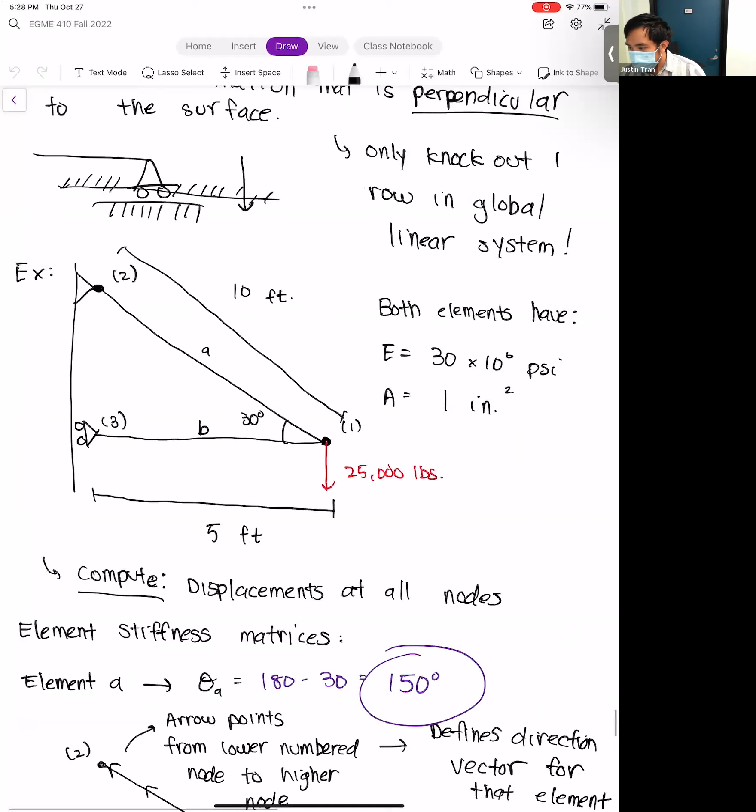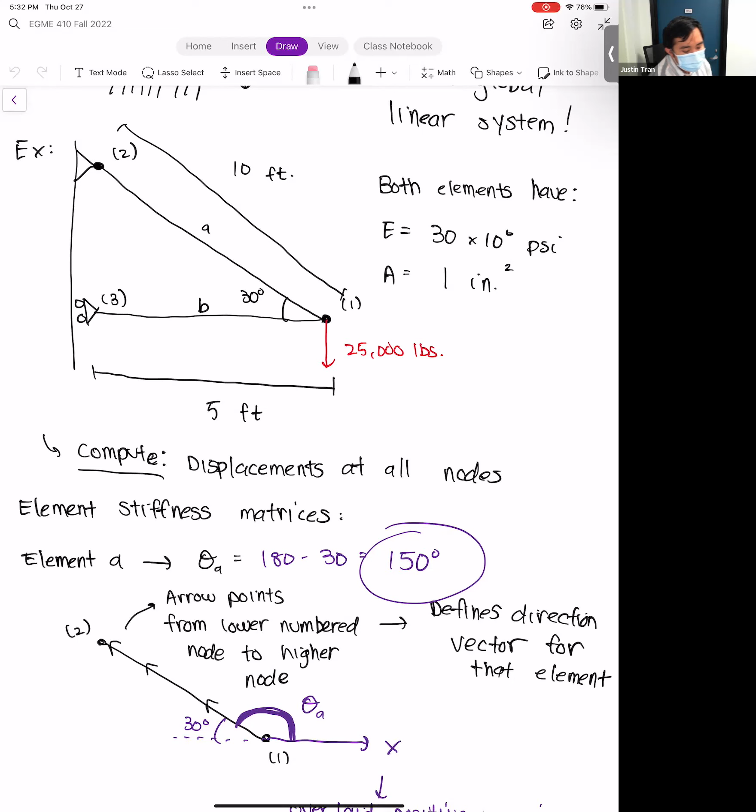So this is the example we were doing, a simple 2-truss system with two elements, element A and element B. Just like normal, we're interested in computing the nodal displacements for this truss bar. We're going to go through our entire finite element process same as before: computing the element stiffness matrices, assembling them into a global stiffness system, and then solving it from there.

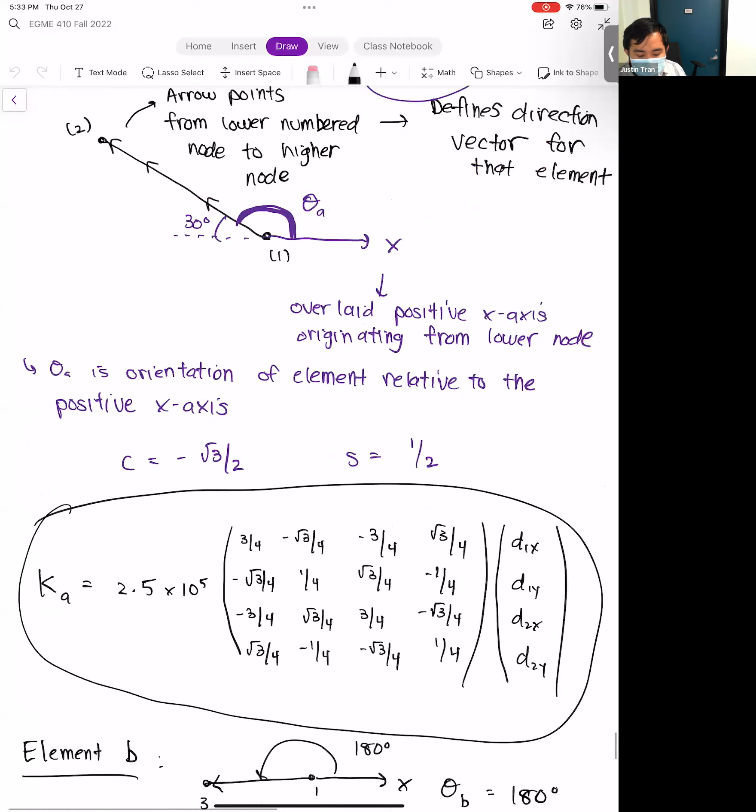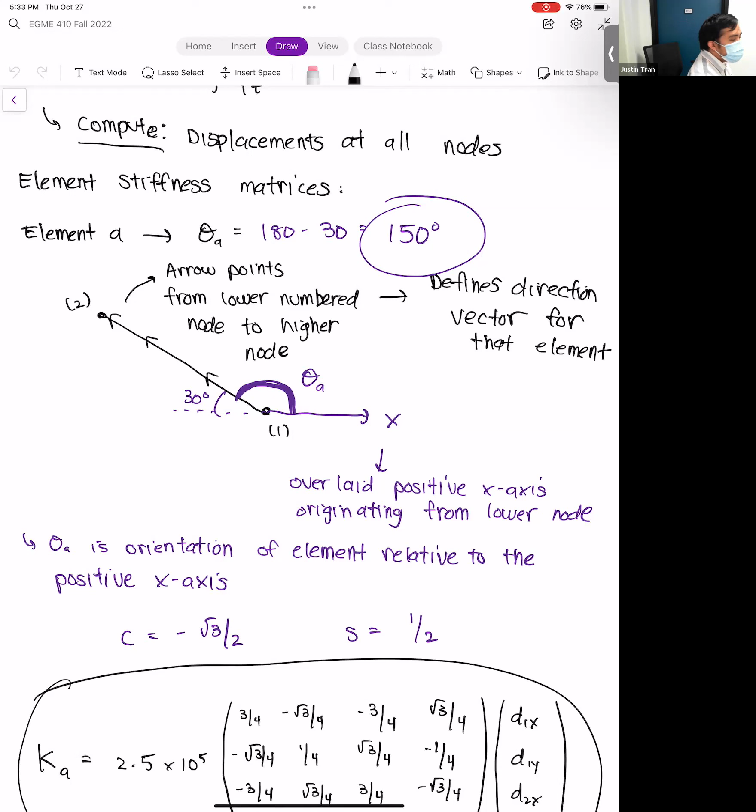Where we left off was computing these element stiffness matrices, and the main point I wanted to make before we left last time was to be careful about the angles you put into the system, because when we plug that into our element stiffness matrix for a 2D truss, the assumption is that the angle is the angle that element makes with the positive x-axis.

The trick I told you guys about last time was to take your element, draw an arrow from the lower numbered node to the higher numbered node—that's your element vector—and then compute what angle you would need to rotate from the positive x-axis in order to get that vector.

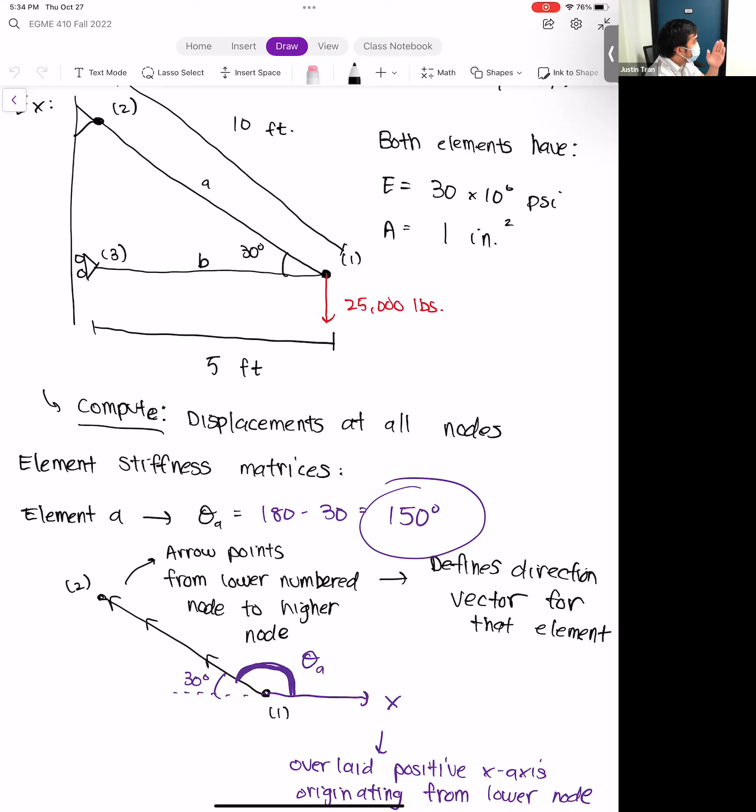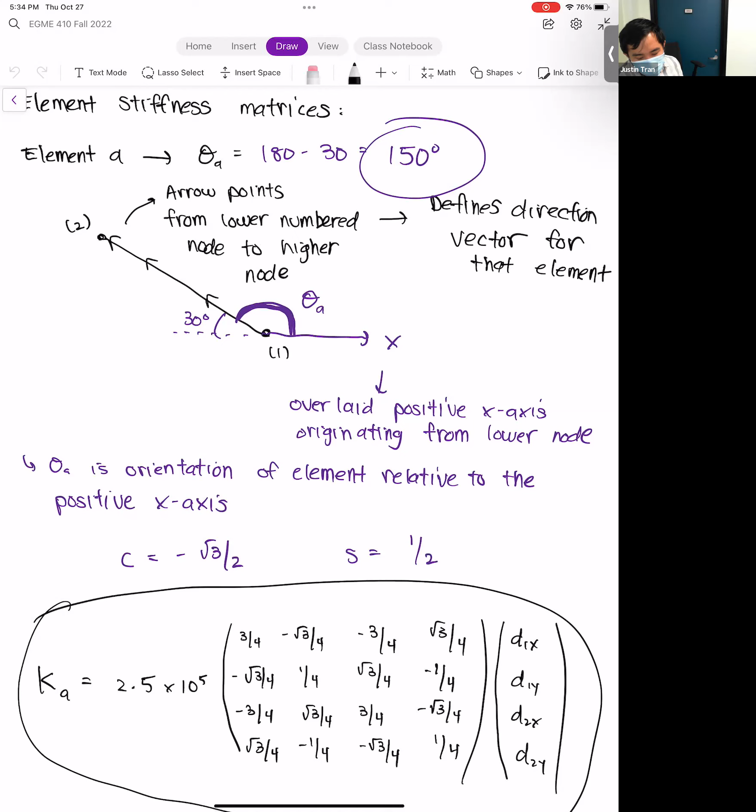For element A, even though in the figure we can see that element A makes a 30-degree angle with respect to element B, the arrow that points from node 1 to node 2 actually requires us to rotate by 150 degrees from there, and so we would have that rotation.

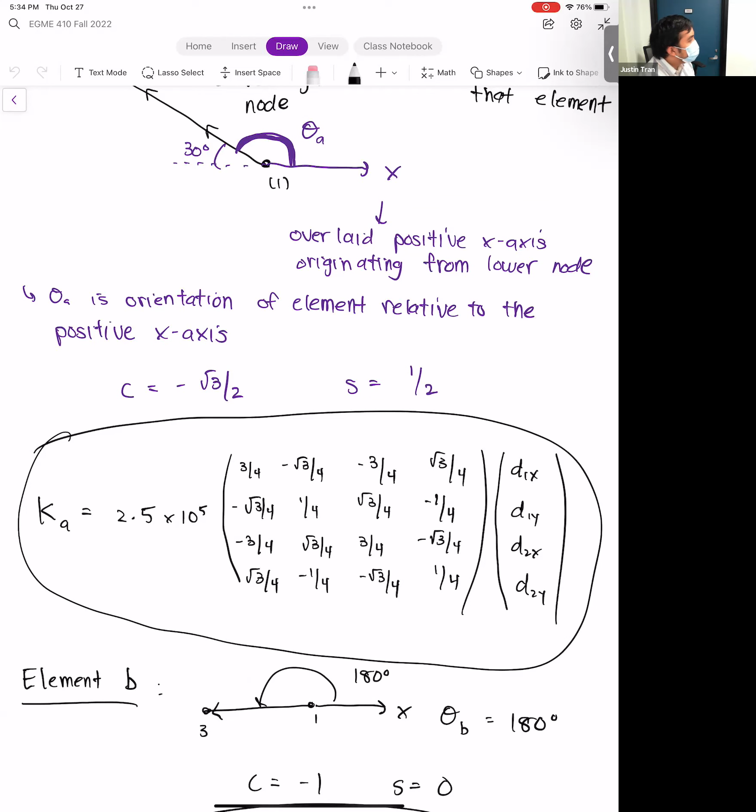And so the angle we plug in is 150. If we plug in an angle of 150, cosine of 150 degrees is minus √3/2, and sine of 150 is a positive 1/2. We plug all that in, plug in the values for AE/L, we get 2.5 times 10⁵, and then we get the following system.

And then we did the same thing for element B. For element B, even though it's a horizontal element, in order to get that exact angle, you would actually have to rotate 180 degrees, because the arrow from the lower numbered node to the higher node points to the left, so that would be 180 degrees of rotation.

We plug in 180 degrees, we get cosine of 180 is -1, sine of 180 is 0. We plug that in and get the following element stiffness matrix. So when you're computing these element stiffness matrices, you want to be careful about the angle you plug in, because it may not be obvious from the figure. Now that we have both element stiffness matrices, we are ready for assembly.

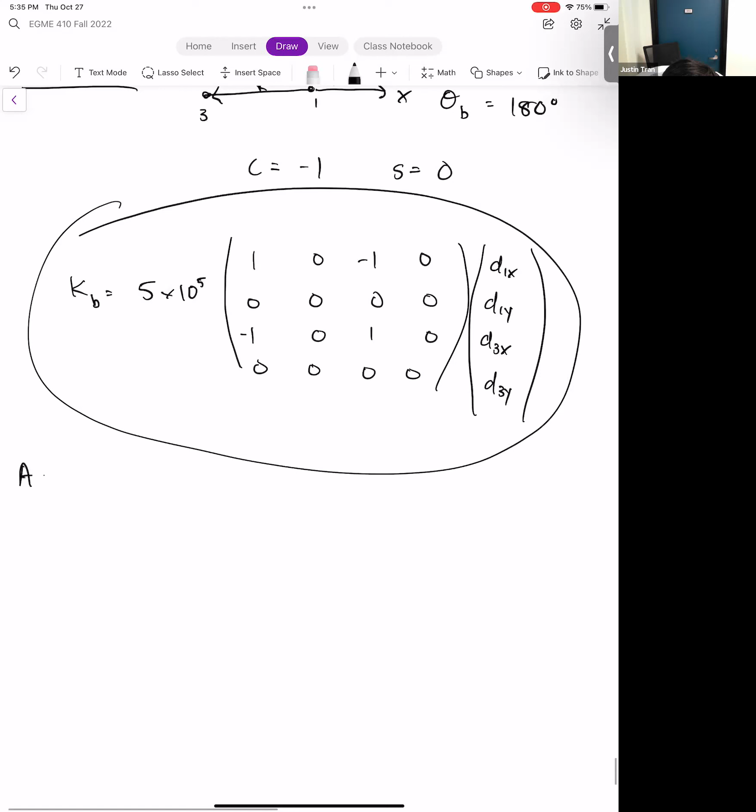So for this geometry here, we have 3 nodes, and since we have 3 nodes, our global stiffness system is going to be 6 by 6.

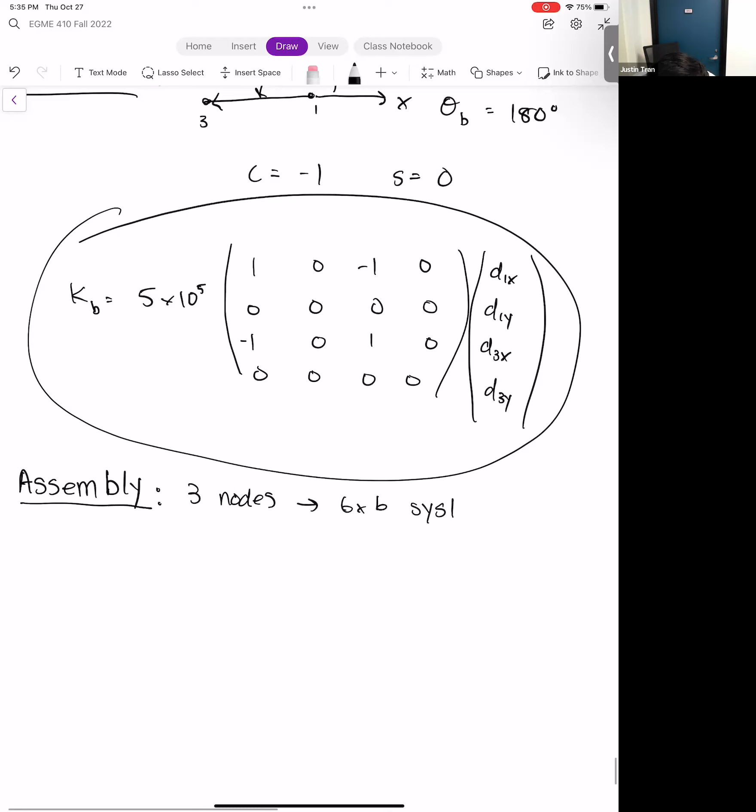Let me go ahead and do that. We're going to have D1X, D1Y, D2X, D2Y, D3X, D3Y. Now on the left side here, we're going to have F1X, F1Y, F2X, F2Y, F3X, F3Y. And of course, on the right here, we have D1X, D1Y, D2X, D2Y, D3X, D3Y.

All right, so there's our global system, and it has the X and Y deformations for all 3 of our nodes, so that's going to be 6 rows and 6 columns overall. And now we're going to be inserting the values into this system.

Oh, actually, let me do one thing first. Because we have a factor of 10 to the 5th on the outside there, I'm going to put a 10 to the 5th there, so that's just going to make it a bit easier for us when we plug in.

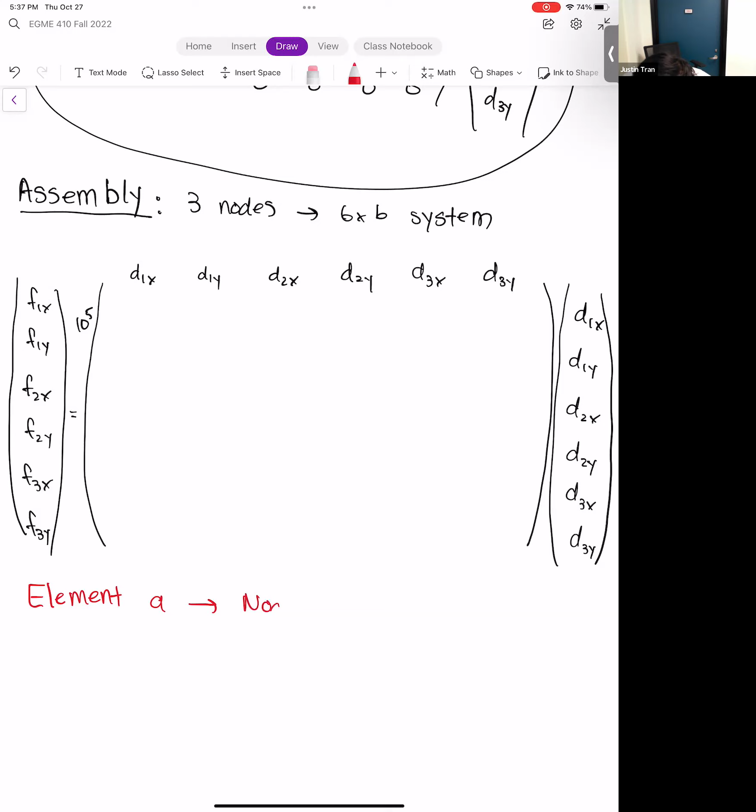All right, so let's start with element A. Element A here, we know is connected to nodes 1 and 2, and so that means we're going to block off the node 1 and 2 rows and columns of the global stiffness system.

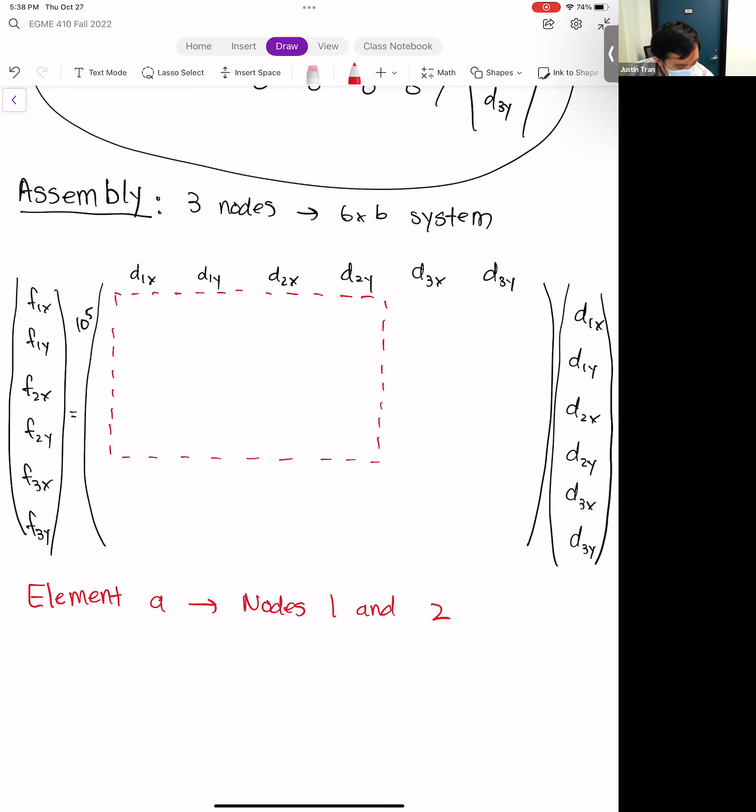And so that's going to be that segment there. I'm not going to fill in the values just yet because this actually gets a little bit messy because we have √3s over 2s, so I'm just going to show you what sections they're going to be in.

All right, so now let's do element B. Element B here is connected to nodes 1 and 3, and so we're going to block off those sections. Unlike element A, which gets a nice big contiguous block for all 16 values, for element B we're going to have to split it up.

So we're going to have this section for D1X, D1Y, and we have the cross sections for D1X, D1Y, and D3X, D3Y, and we have the D3X, D3Y, D3X, D3Y section. All right, so those are the sections of the global stiffness system where we're going to plug in our values.

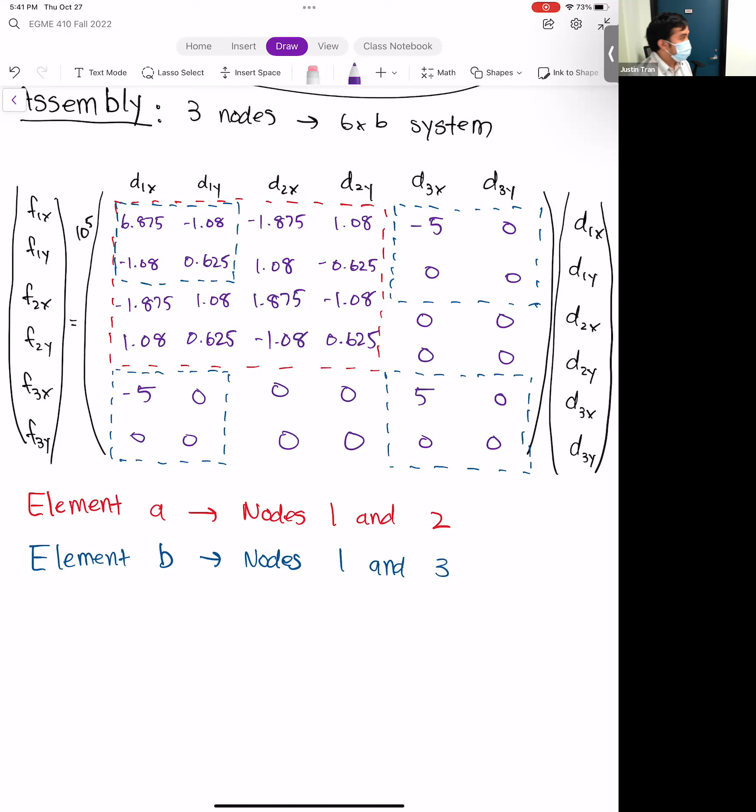So that is our global system. We entered all the entries from element A, and really all the complications are coming from element A. Element B kind of fills everything, and as always, for sections of the global stiffness system which are not boxed, we're just going to input zeros in those locations. All right, and so that is assembly.

Next thing we're going to do is the boundary conditions.

And as always, we're going to start with the supports, the places where we are constraining our geometry. Then from there, we're going to put in our loads, which we just have one in this case.

The first thing we notice from the geometry is that we have a fixed support at node 2. This tells us that d2x equals d2y equals f2x, f2y, all of that's going to equal 0. So we're going to go to those rows in the global stiffness system, the third row and the fourth row, for f2x, f2y, or d2x, d2y.

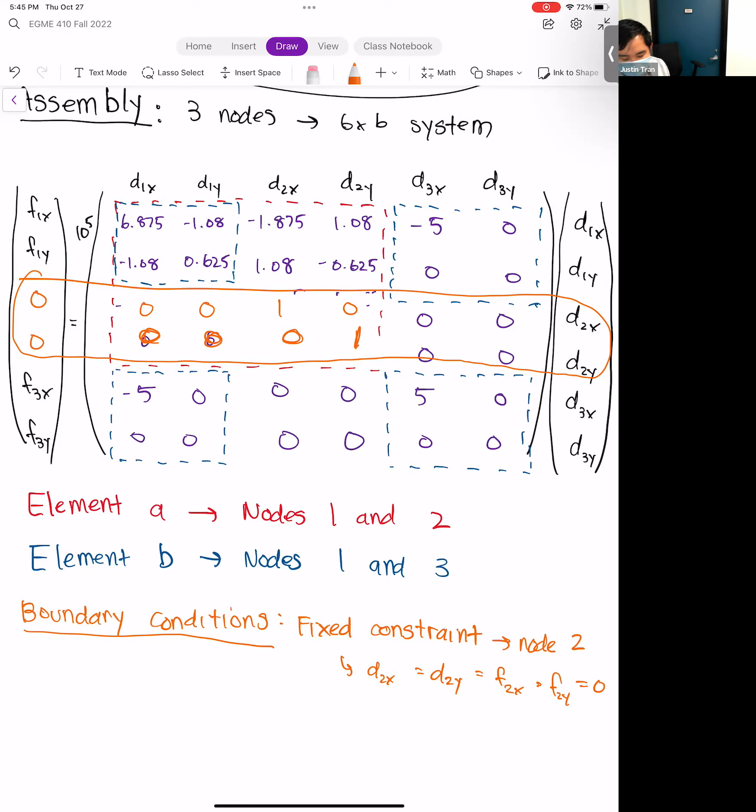And we're going to replace these with the appropriate values. That's our fixed support, so that's going to be knocking out rows 3 and 4.

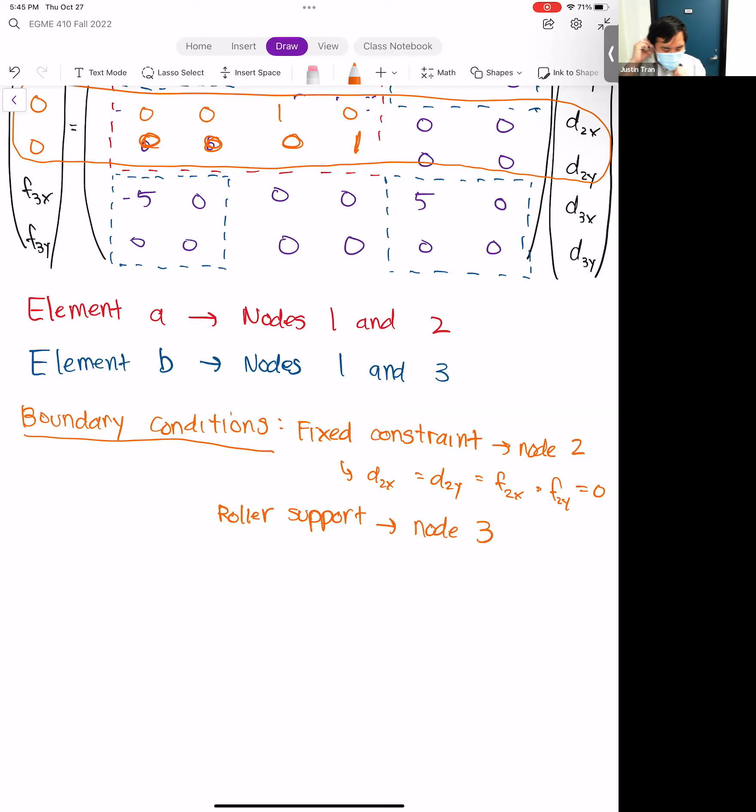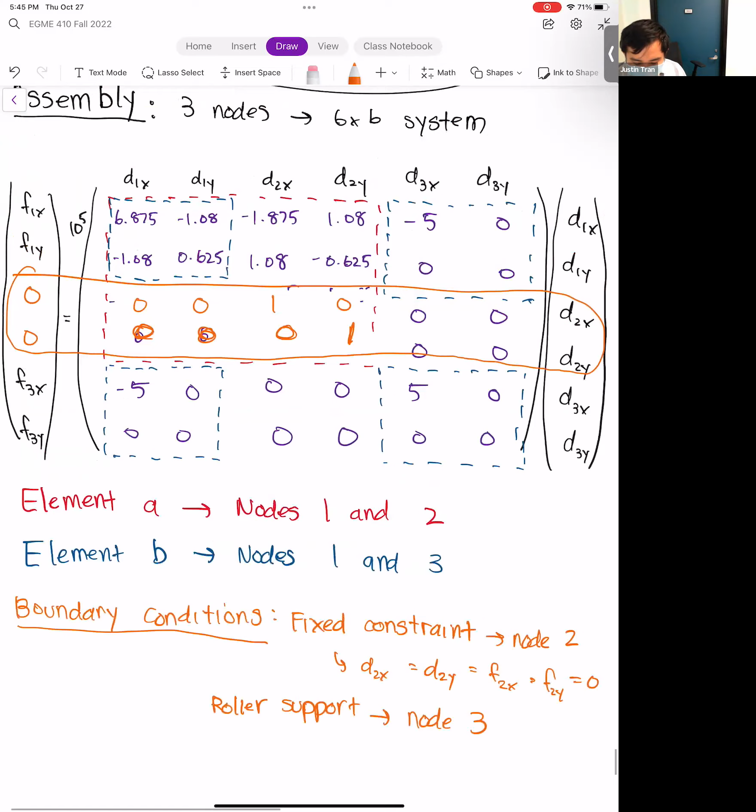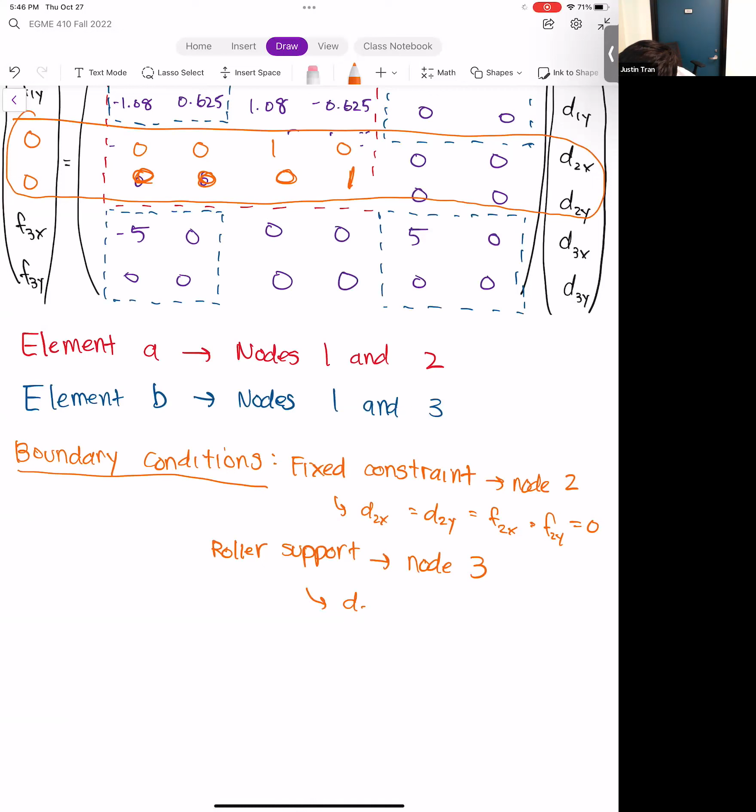Next boundary condition that we have is a roller support, acting on node 3. Remember, the roller support is a bit different than the fixed support, because it's only going to constrain one direction of the deformation. Going back to the figure, we can see that the roller here is vertical, so what this does is prevent any deformation in the x direction. This means that d3x equals f3x equals 0. So this is different. Normally with the fixed support we knock out both components of the deformation, but this time we're only going to knock out one of them.

So if we go to f3x right here, we're going to change this row just like we did the row above it, but we're not going to change the f3y row.

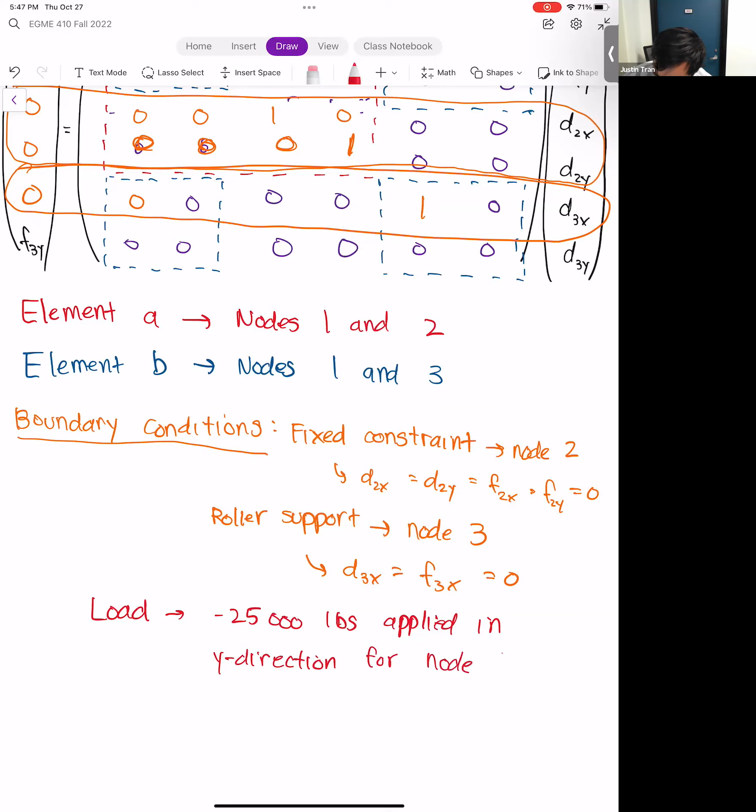So applying our boundary conditions, we get the following system. Although we're not done yet, remember we also have our load. Our load in this case is minus 25,000 pounds applied in the y direction at node 1. This means that F1y is equal to minus 25,000.

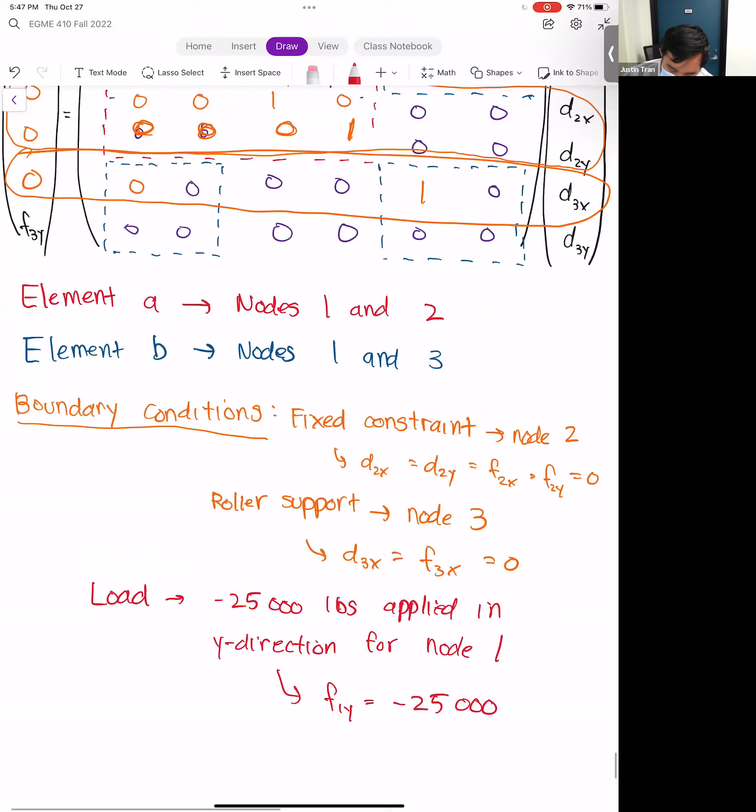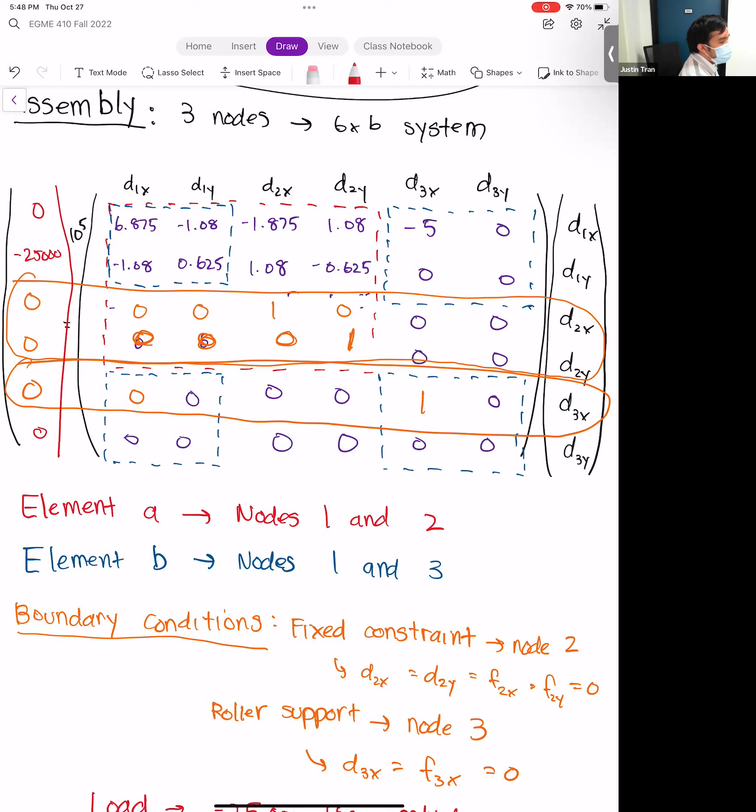And of course, this means that everything else that we haven't specified yet is going to be 0. That's the system that we have after we've applied our boundary conditions. Any questions on how we obtained this result?

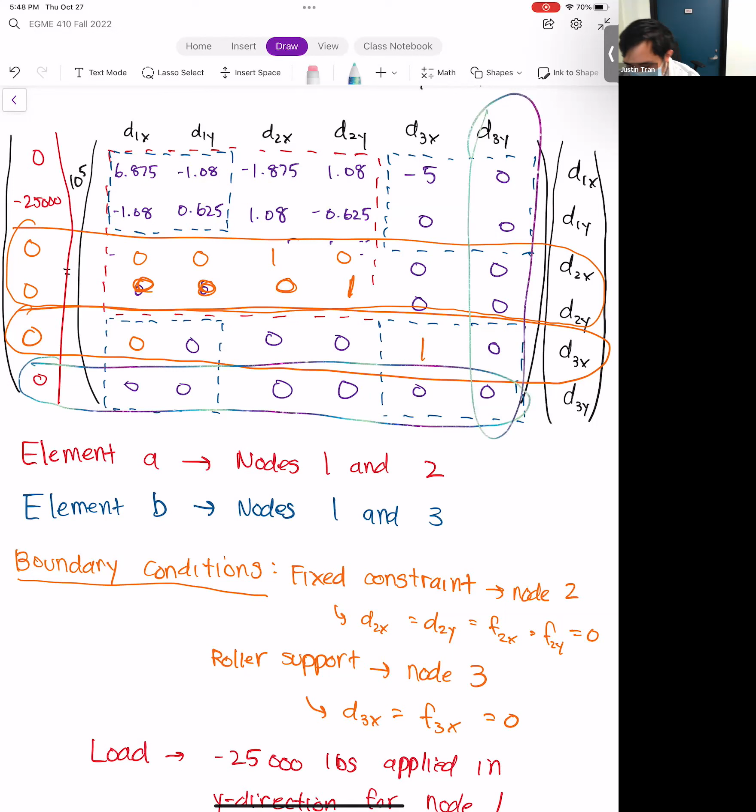At this point, usually we're ready to solve, since we've applied our boundary conditions. But there's one problem with this system, let me go ahead and highlight it. If you look at the section that's highlighted, you'll notice that everything in that D3Y row and everything in that D3Y column are all zeros. If you try to pop this matrix into MATLAB, when you have a row and column that's completely zeros, MATLAB is going to give you an error.

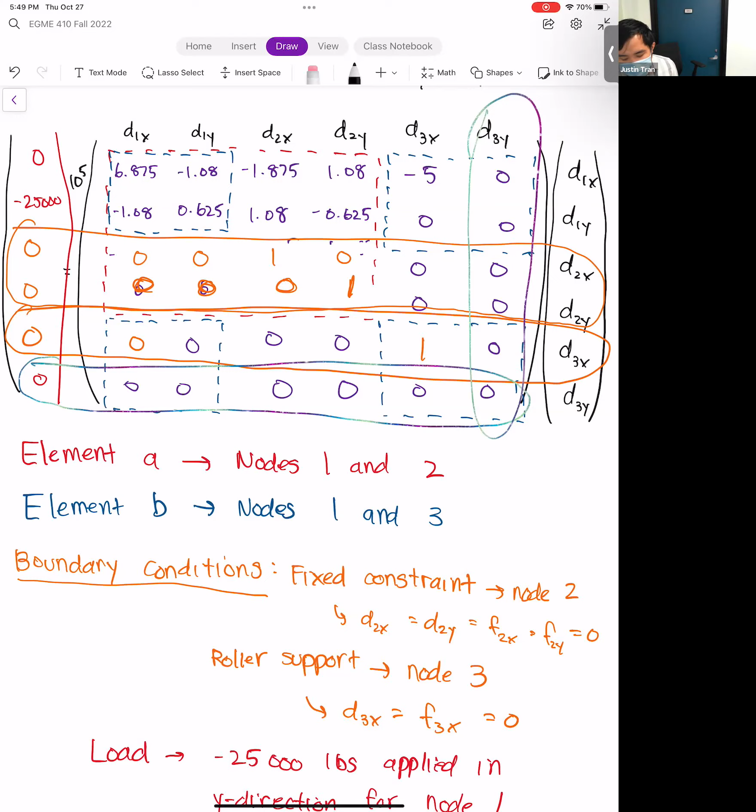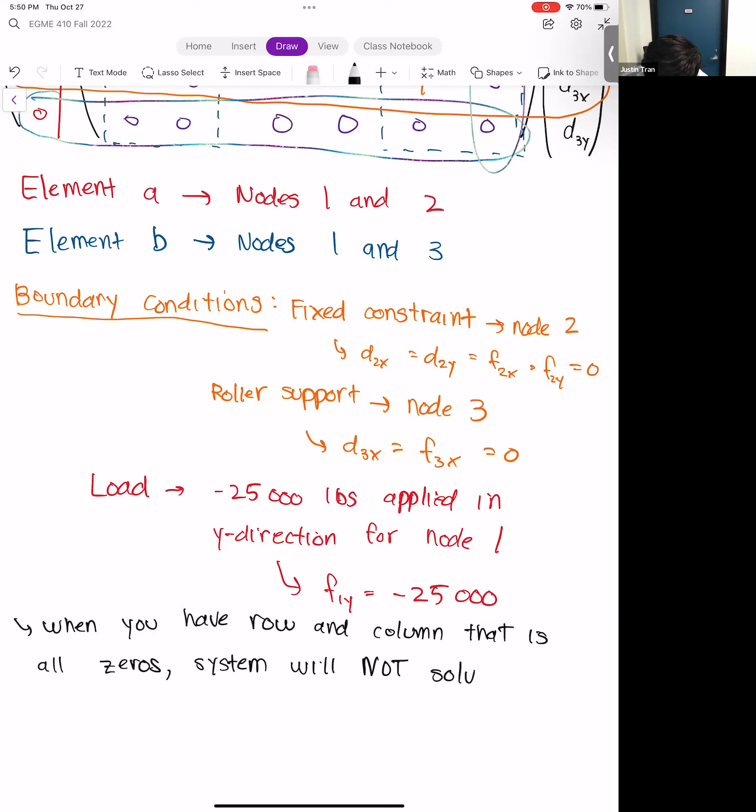It's going to tell you that this is not possible, that you can't solve this matrix. When you have a row and column that's completely all zeros, the system won't solve. If you try to plug this system into MATLAB, it's going to tell you it's not going to have a good solution. In order to fix this, in order to make it so that you actually can solve the system, what you need to do is go to that row and column and put a 1 on the diagonal.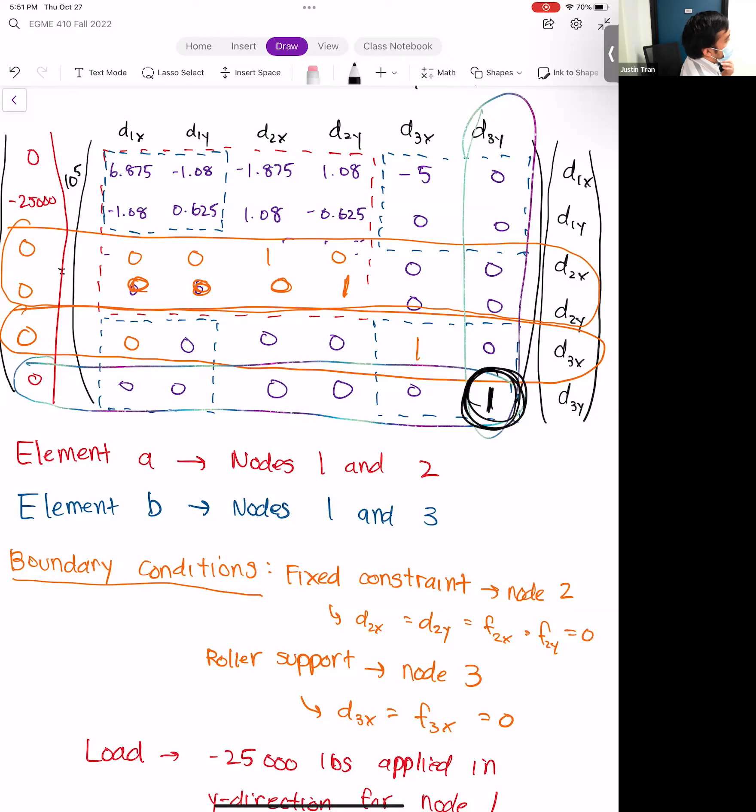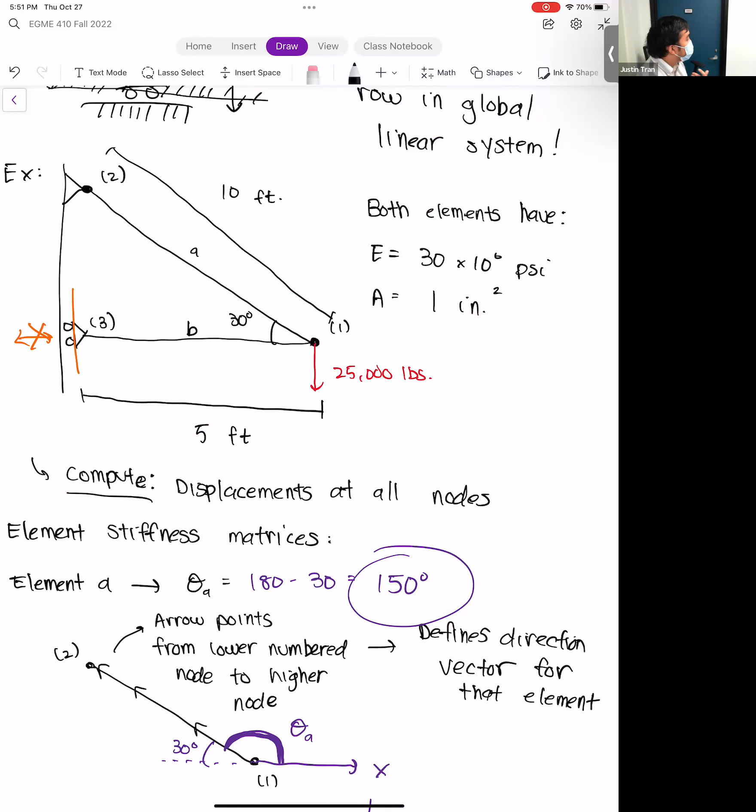So we're going to go here and put a 1 right here. We effectively turn it into a fixed support, even though we started with the roller support. What this is telling us goes beyond just a mild inconvenience. It tells us that if this structure is comprised of just truss elements, then if we put a roller support there, it's actually going to be unstable, and so it's not going to be able to sustain this kind of deformation.

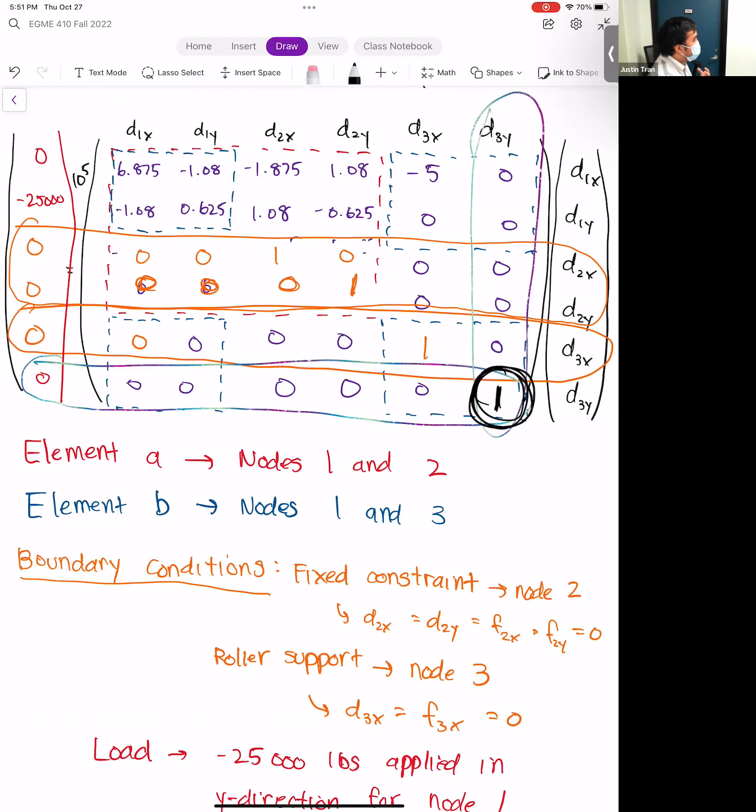If you have a row and column of all zeros, your system is statically unstable. Think about it in real life: say you have popsicle sticks with a pin support on two sides, but on one side you just have a roller. If you pull down on it, or even just by gravity, since it's only a roller, that side is going to move down. It can't sustain this configuration in its current state. So if you have a row and column of all zeros, that's basically what it's telling you.

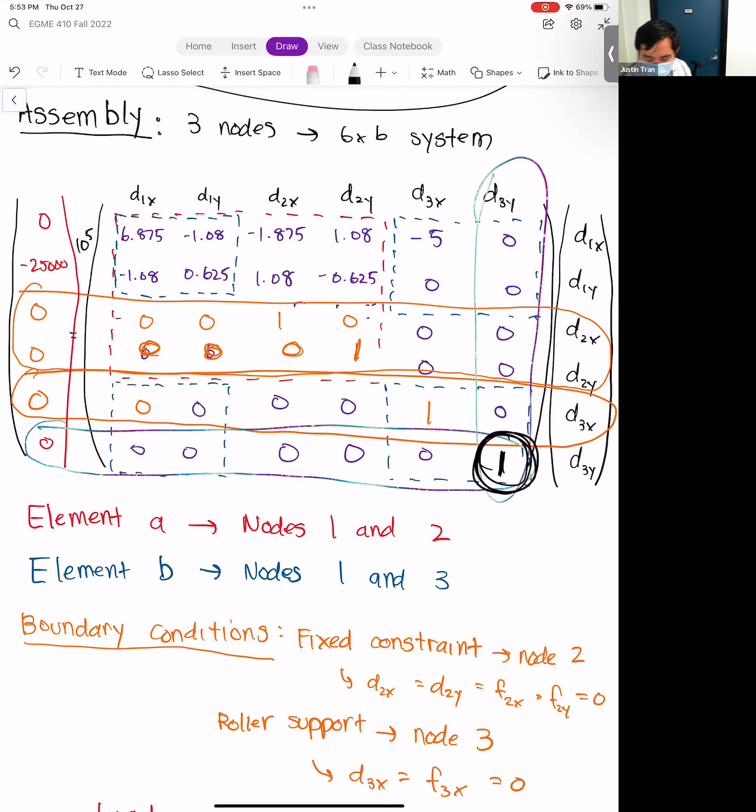If you get a situation where the rows and columns are all zero, you have a busted system. You need to go back and see if this can actually happen, and if there's a better configuration. But the temporary fix, just to make sure you can solve the system, is you put a 1 on the diagonal. That effectively transforms it from a roller support to a pin or fixed support, just for the sake of solving the system.

Unfortunately, the way I've restructured this class, this is kind of an unsatisfying conclusion, because roller supports are used quite a bit in real finite element analysis. We did it in activity 4 with the displacement condition on the rod. So it's used, it's just that because we're stopping after beams, you're not really going to get a chance to see roller supports take full effect.

To see roller supports in their glory, we need to go to frame elements. But frame elements, I've tried it a couple times, even with my grad students in 541, and it is universally disliked. I don't think anyone enjoys doing the frame section, even myself, and it's a little too much work.

But I did want to cover it here just to let you know roller supports do exist, and you can constrain specific directions. It's just that for a 2D truss element it doesn't really work out well — you end up with unstable situations like this more often than not. But it is interesting to see.

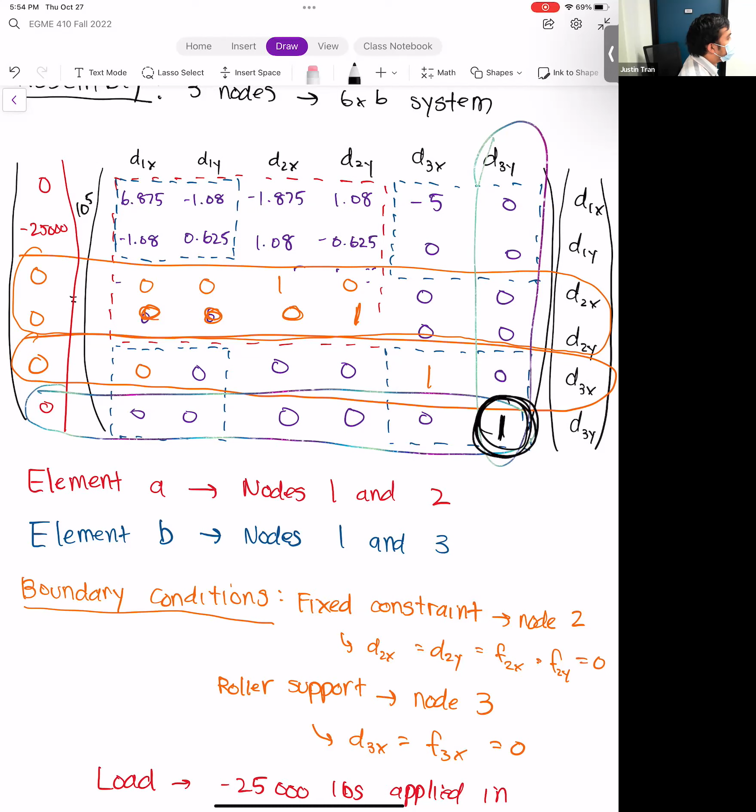I'm going to post the next homework assignment pretty soon. So if you do come across a situation where you have a roller support and end up with a row of all zeros and a column of all zeros, the way you fix it is you just put a 1 on the diagonal.

Any questions on that?

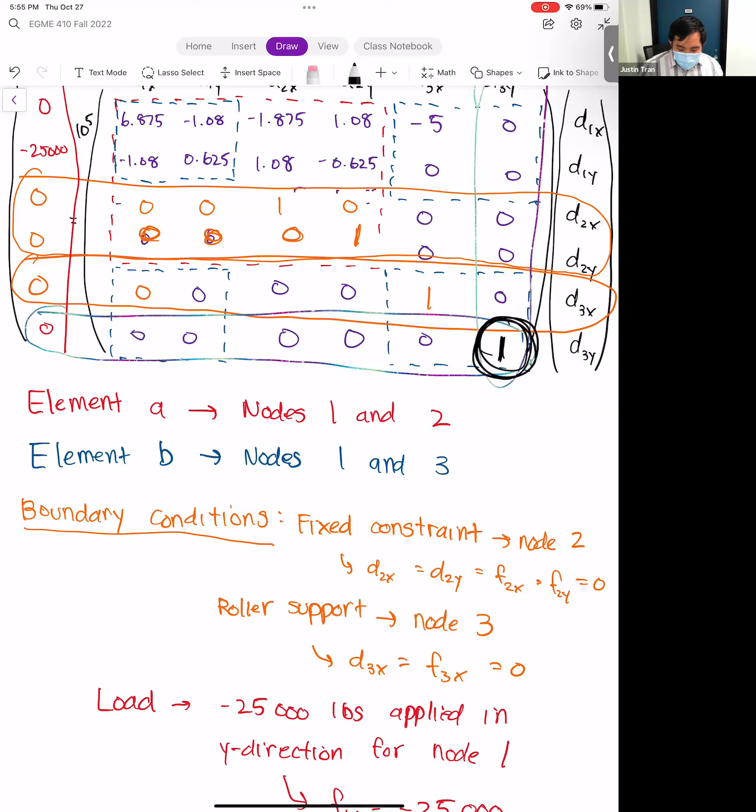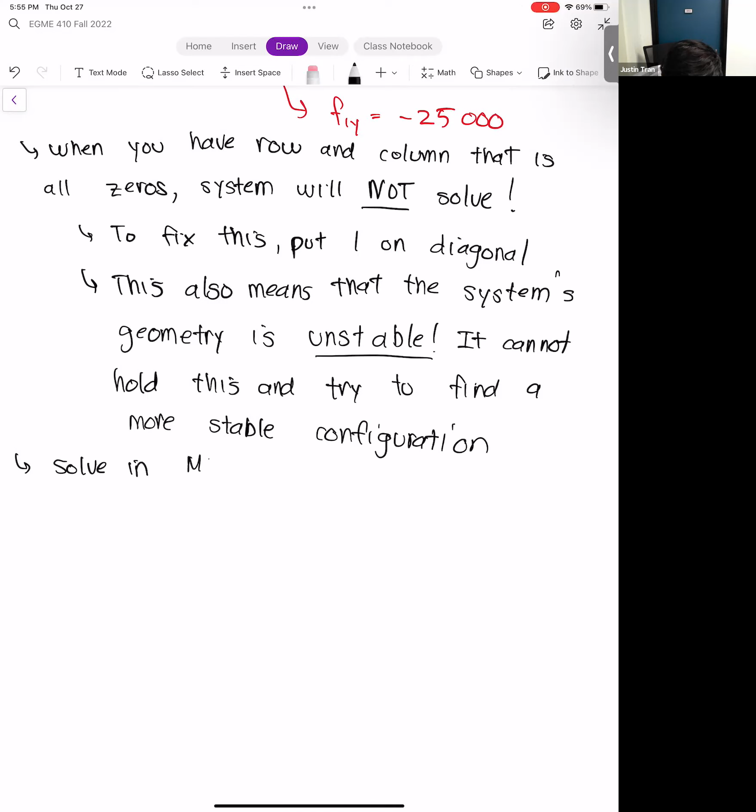If we go ahead and solve this in MATLAB, what we get is d1x equal to minus 0.0862 inches, d1y is minus 0.549 inches. d2x and d2y are 0 because that's the fixed support, and d3x and d3y are also 0, because we've turned node 3 into a fixed support as well.

That is the last example for trusses. There's one more point I want to make, and it leads into a bigger point with ANSYS 2, and that is how to leverage symmetry.

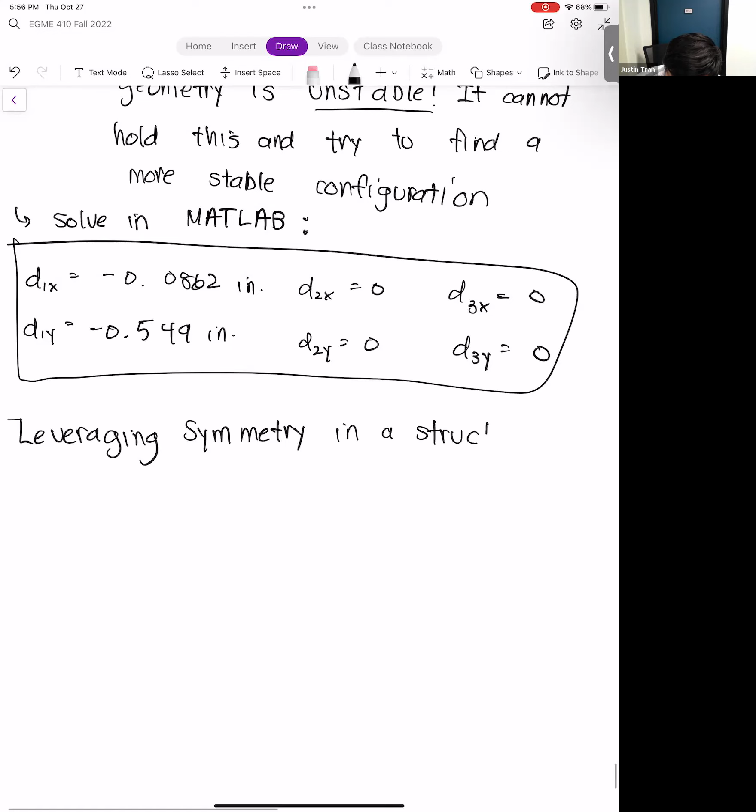Symmetry is a great tool in finite elements, and I'll show you how to do it with trusses here, since it's fairly simple. But you can use symmetry quite a lot in other situations too, even in ANSYS. If you haven't started your simulations in ANSYS and you've chosen a particular geometry, you can actually use symmetry in that case, and there's a clever way to do it in ANSYS.

But let's define symmetry first. When I talk about symmetry, what I mean is that you have the exact same part — if you put a mirror in the middle of a part, you're going to see the exact same part on the left and right of that mirror.

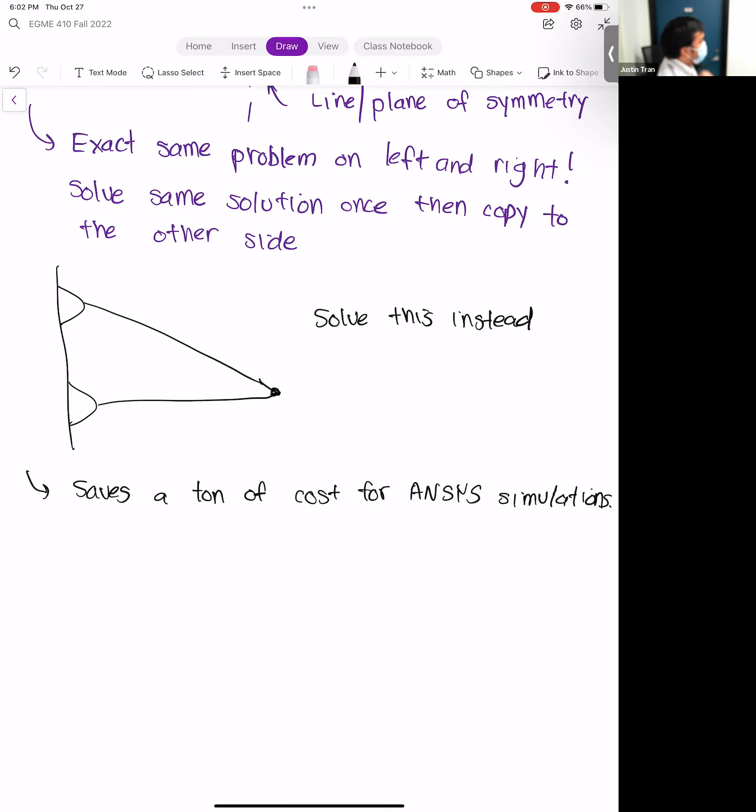I don't care how big a whiz you are with meshing in terms of how you refine certain areas, how many little tricks you do with meshing. You're not going to beat symmetry.

And so symmetry is literally a 1/2 reduction in the amount of space that you have to simulate. So you're not beating that no matter how much of a whiz you think you are with meshing. If you can apply symmetry to your problem, that's a huge plus.

All right, and so the only thing that you have to be careful of is that not only do you have to have symmetry in the geometry, you also have to have symmetry in the boundary conditions as well.

And so it's not going to work if you don't have that symmetry. I'll give you one example here. Let's say that we have a couple springs and they're attached like this. Let's say that this point right here is fixed. We'll say both of these are identical springs, and so they have the exact same material properties.

But if we have a situation where we're pulling on one spring, so let's say we're pulling the spring on the right in tension, but we're compressing the other spring on the other side, we can't apply symmetry here because the boundary conditions are different. Even though the geometry is the same, the material properties are the same, we can't apply symmetry here.

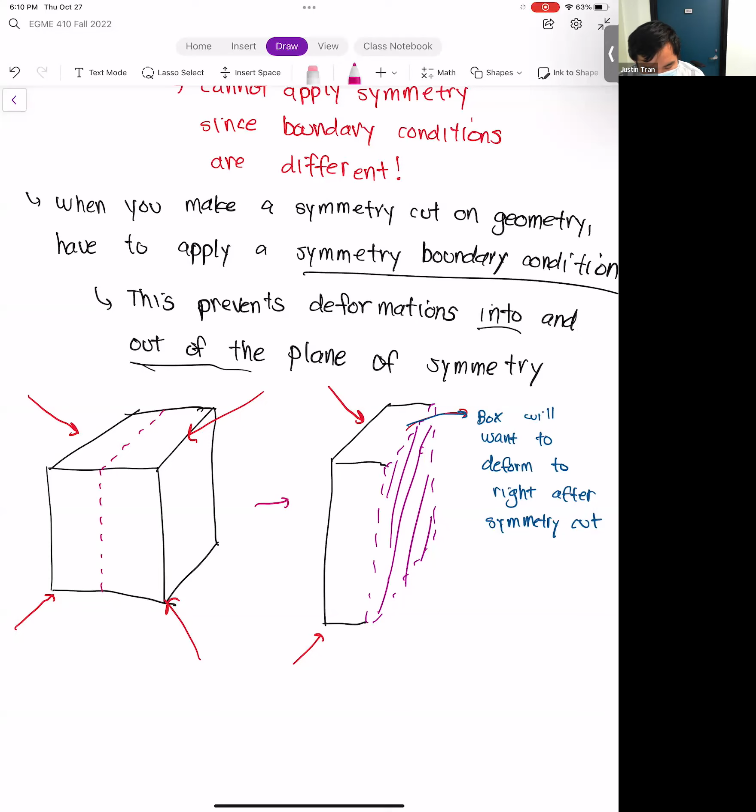But obviously that's not going to happen in reality, because if we look back at the original box, the thing that prevents deformation in that direction is the other half of the box. So you want to make sure that when you make a symmetry cut like this, you prevent something like that from happening. To prevent that, we add our symmetry boundary condition, which is nothing more than just a roller support.

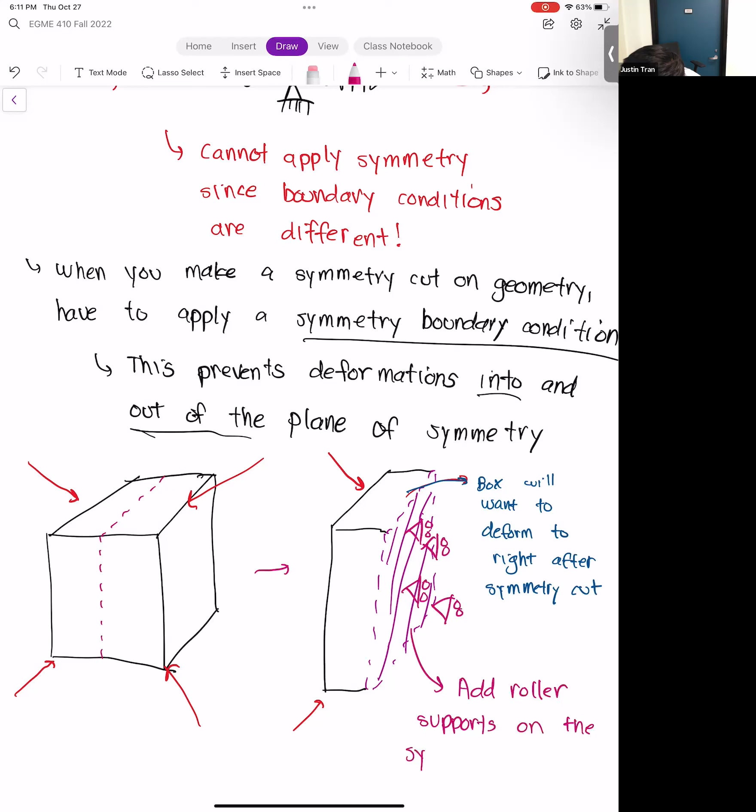So we add roller supports on the symmetry cut plane, to prevent deformation from happening in that direction.

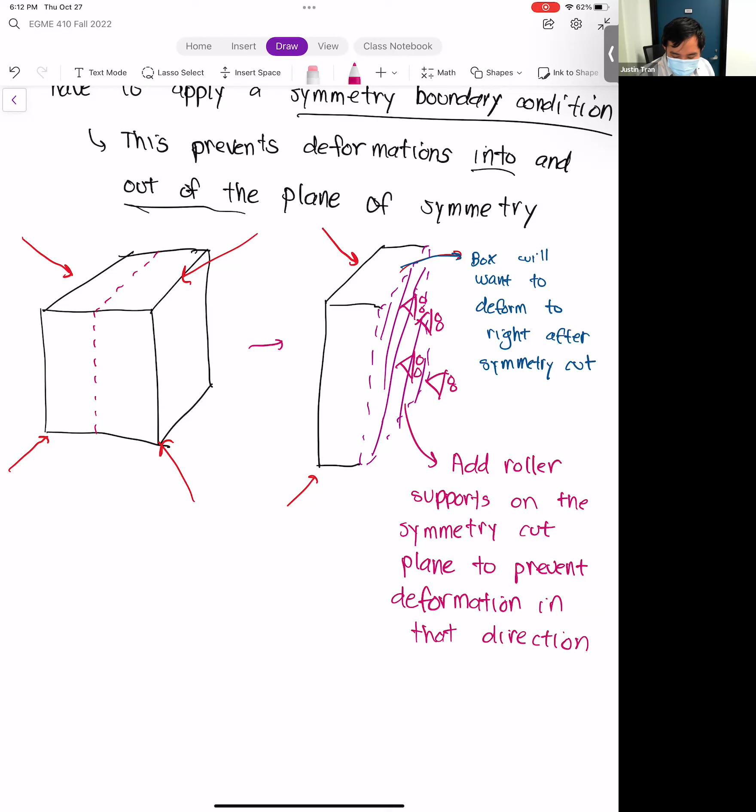So that's symmetry. You could apply that in ANSYS, but you can also apply it to these truss problems as well. All right, and that's it for trusses — it took us almost four lectures, but we finally got through trusses.

There's one more topic I want to go over in direct stiffness, just because I think it completes a nice picture, and that's the beam equations. Let's talk beam equations.

Up to this point, we've gone over two of the direct stiffness elements: springs and trusses. Really, those two elements behave more or less the same way — they can just be compressed or stretched. But as you know, when you have a structural member, even a slender one, you can have deformations that go in different directions. So the beam element is designed to give us ways to compute deformations that are not compression or tension.

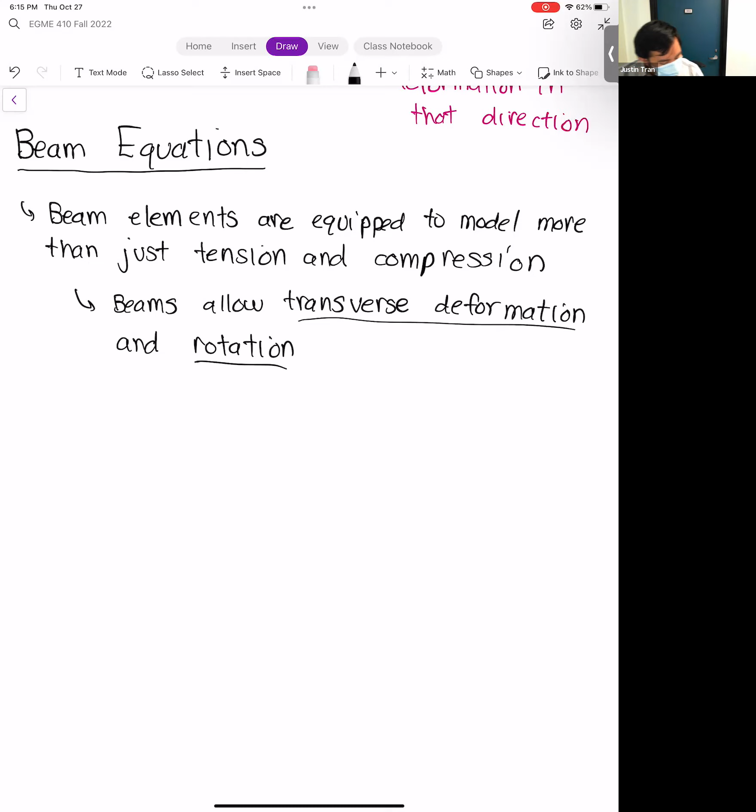All right, let's go ahead and draw a beam element. The shape of the beam element is going to be the same, so we're talking about a long, slender element here. Up to this point, we've only covered truss elements that can deform this way. Truss elements can only compress and lengthen, but for beam elements, we're going to look at something else.

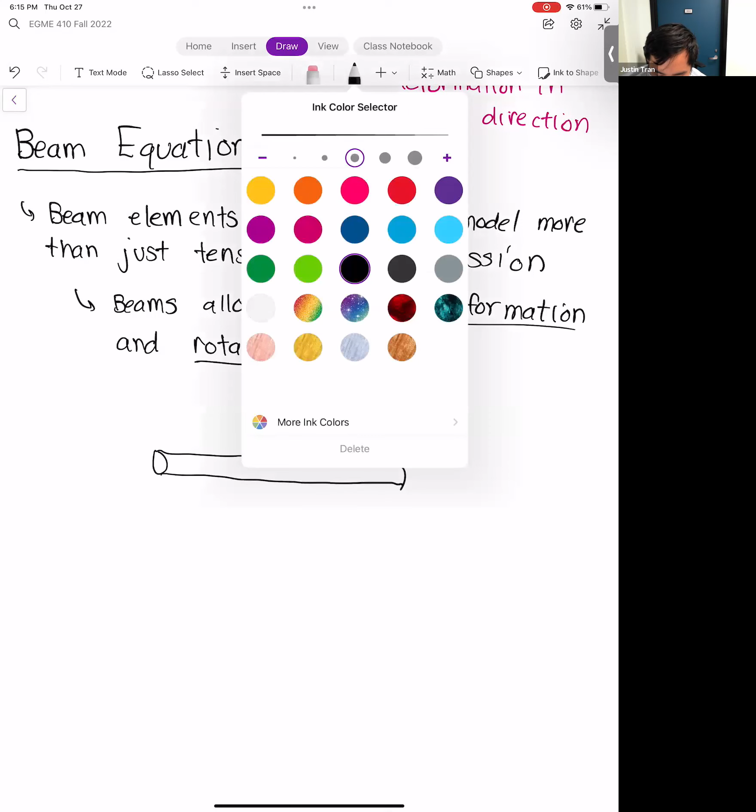For beam elements, first of all, we have transverse deformation. Let me call this node 1, node 2. We're going to consider deformations that are perpendicular to the element itself - that's what we call transverse deformations.

As well as rotations, so our rotation is going to be theta 1 and theta 2. Rotation is not really a deformation, so it doesn't mean that the point there is moving. All the rotation basically tells us is the change in orientation of the beam at those locations.

So this is kind of a big shift. We're strictly in a 1D case here, so we're not looking at beams pointed in random directions. But already in a 1D case, we are up to 4 degrees of freedom, or 4 unknowns, per element.

That means if we have 4 unknowns per element, our element stiffness matrix is going to be 4 by 4. So beam problems are just naturally going to be a lot more difficult than truss ones because their element stiffness matrices are a lot larger.

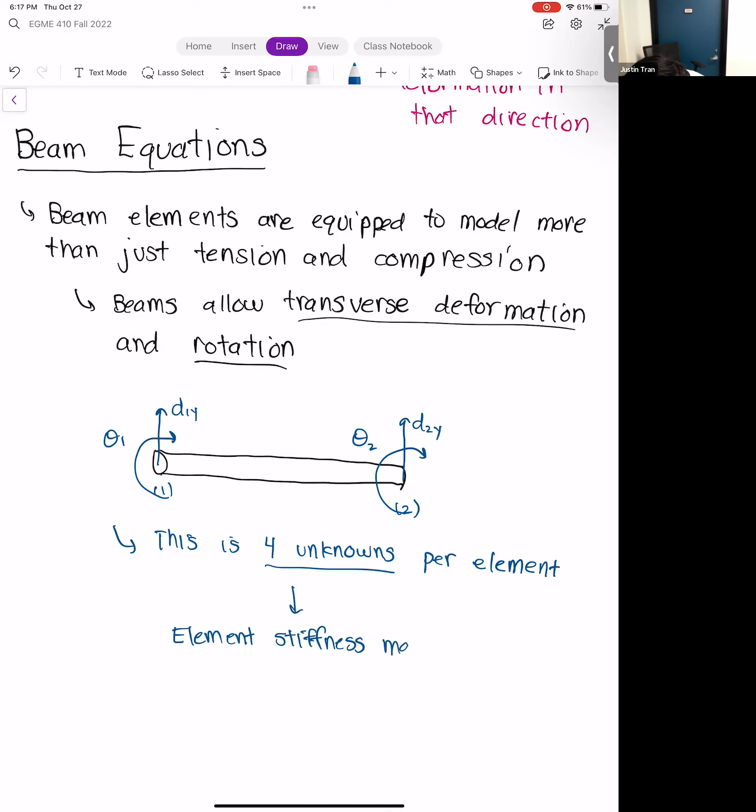Okay. All right. Any questions on beam so far? All right.

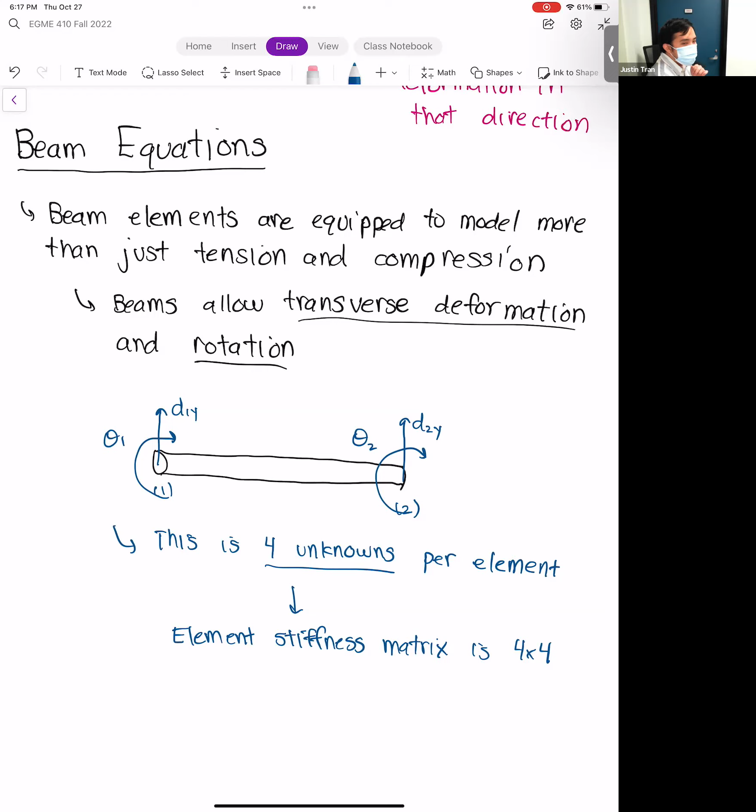Okay, so now that we know what beams are compared to trusses, and what they represent, let's take a look at what the element stiffness matrix is going to be.

So like I mentioned, the element stiffness matrix for our beam is going to be 4 by 4. Remember, the element stiffness matrix relates the nodal displacements or nodal deformations to the nodal forcings. Our 4 nodal deformations here are going to be D1y, theta 1, D2y, theta 2.

And this is going to be equal to our nodal forcing. So here's where things are going to be a bit different too. For the deformation rows, the D1y and D2y, we're going to have a normal force there, so we have F1y, F2y. But for the rows that have the rotations given in units of radians, which is not a real unit, the nodal forcing that causes that rotation is going to be a nodal moment. We're going to call this M1, M2 - these are the net moments applied at the nodes.

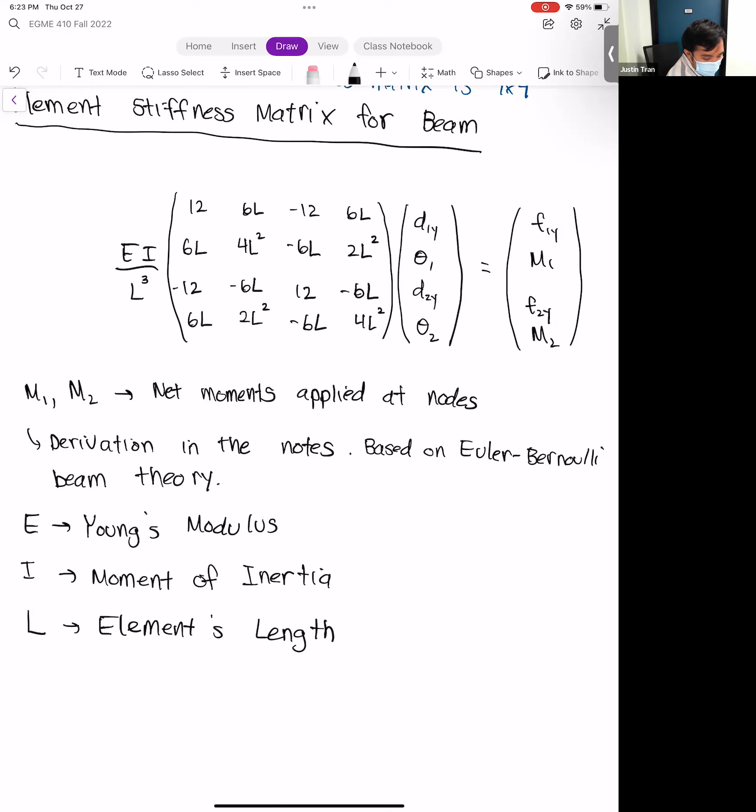Before we jump into the example, I want to go over the different supports, and we're going to introduce a new support here as well, because now that we have angular rotation, how our supports interact with that and how it constrains that is going to change just a little bit.

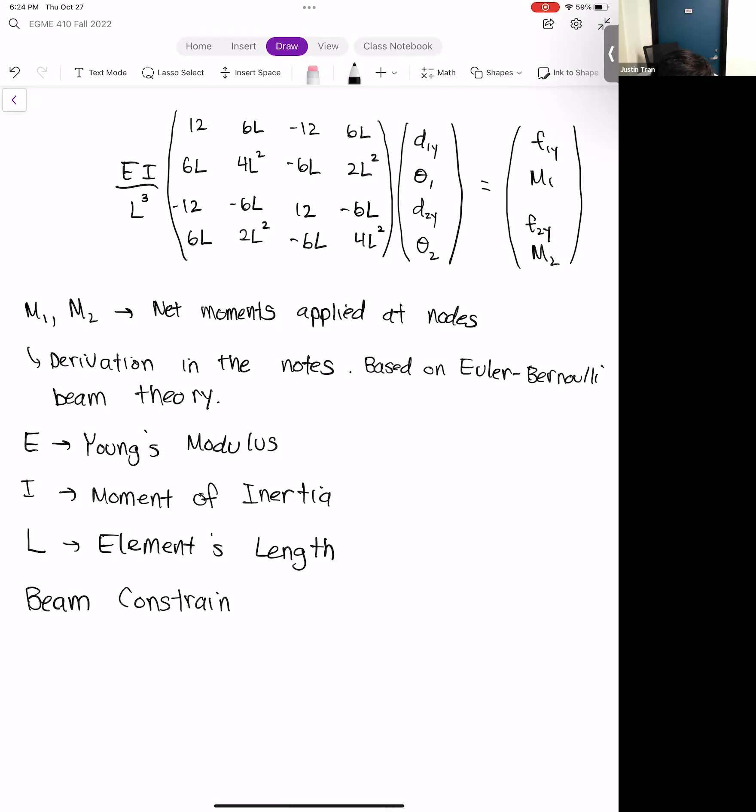I'm going to write the three constraints here in general. Even though for a beam we're not considering deformations in the x direction, I'm going to show it to you anyway, just so you have it for your reference.

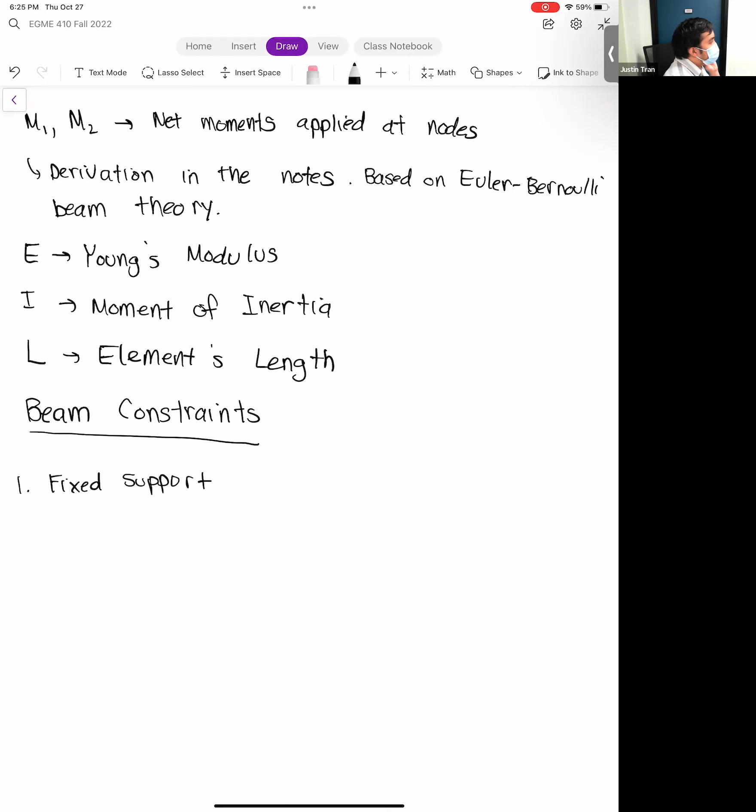Number one is a fixed support. We're going to change the definition for this just a little bit, because for trusses it didn't really matter since we didn't have any rotational deformation. We were actually using a pin support and calling it a fixed support because it played the same role. But in reality, a fixed support looks like the following: let's say you have your beam, and the beam is inserted directly into a wall or directly into a really hard surface.

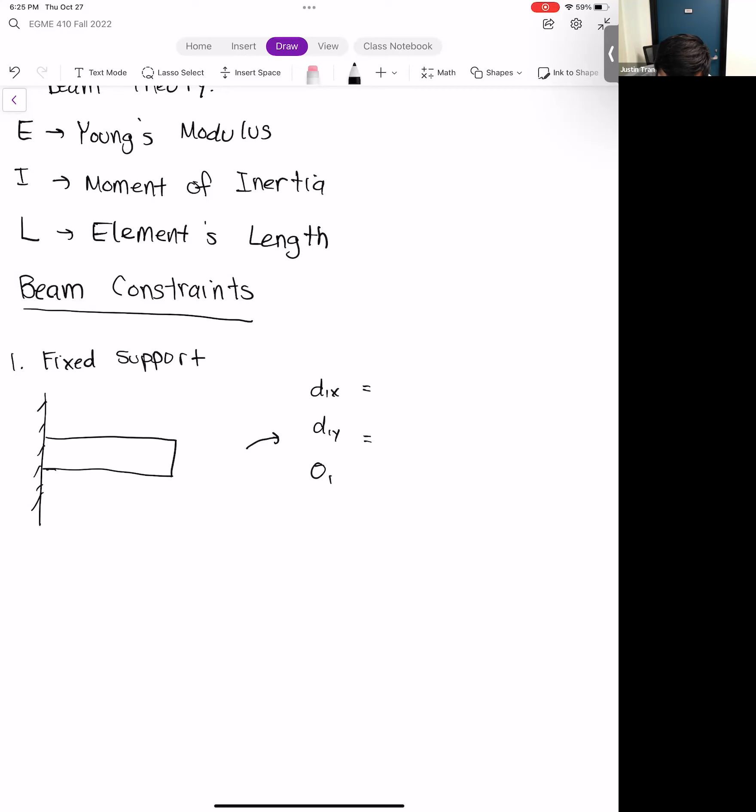In this situation, all three deformations are going to be set to 0. So deformation in the axial direction, deformation in the transverse direction, as well as the rotation are all going to be 0. So we have d1x, d1y, and theta 1, all of these are going to equal 0. Let's say this is the x direction, this is the y direction, and this is node 1 here on the left.

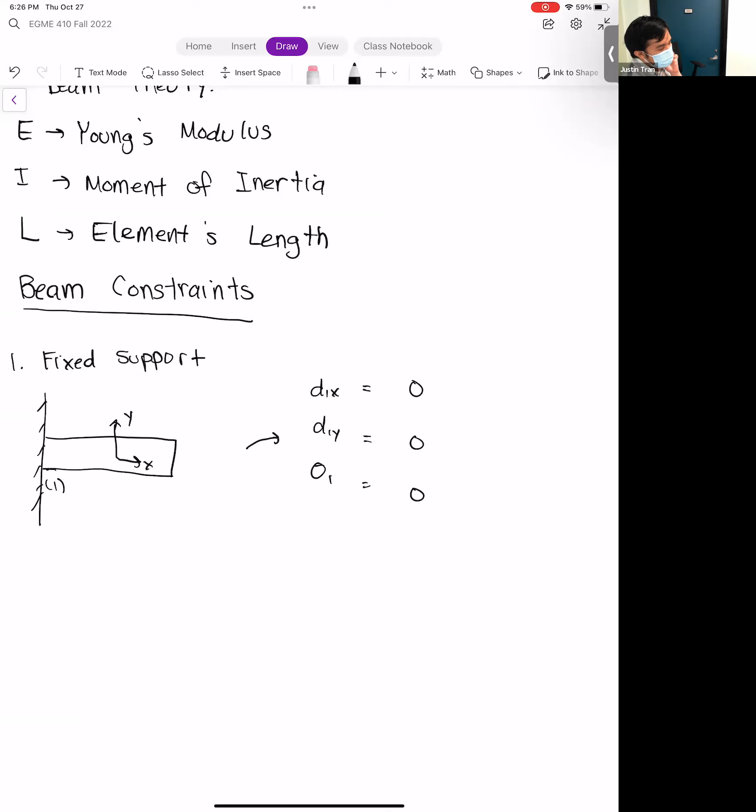So I'm redefining fixed support because before it didn't really matter, but now that we have the rotational component, I want to differentiate that. If you have a fixed support, which looks like the following, then the rotation is going to be set to 0 as well.

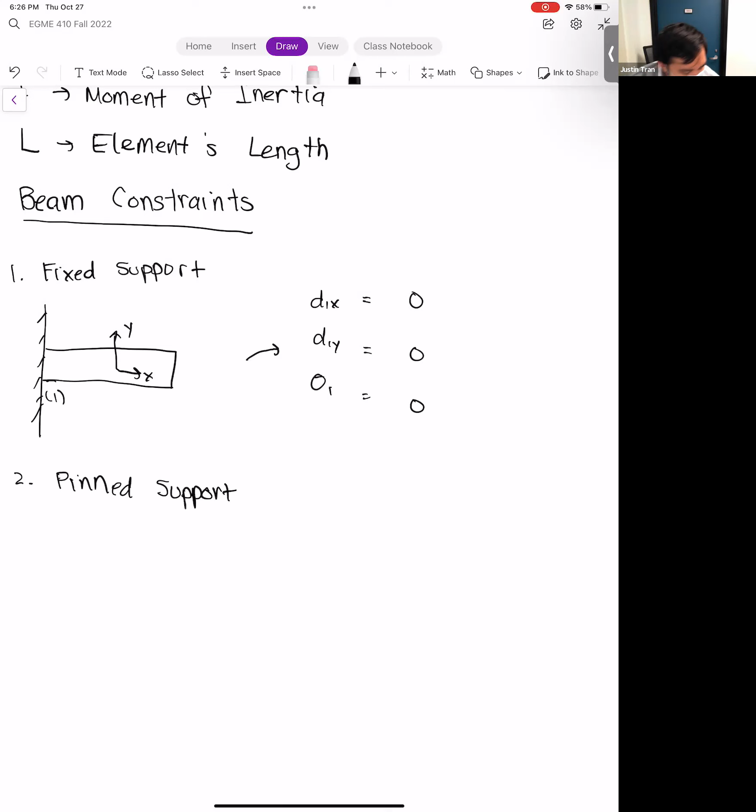But there's going to be no constraints on the rotation. Because you kind of have a rolling pin there, that beam is free to rotate. It can't move, it can't translate at all, but it can rotate up and down. So the way that we define that is that we set theta 1 free. Just like we did in the first example today, if you have a pin support like this and you're looking at the row regarding the rotational displacement, you would just leave it as it is, without changing it at all.

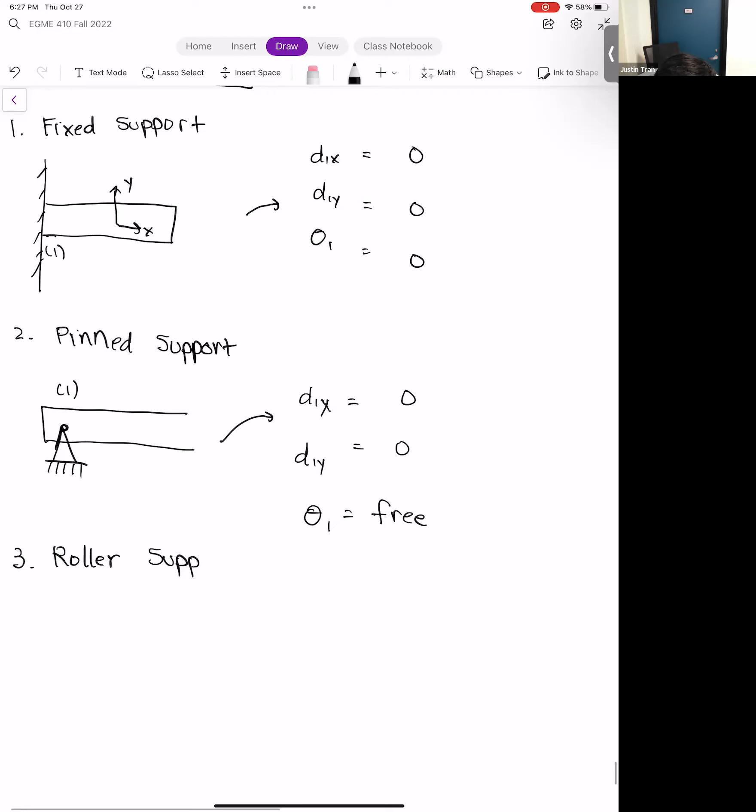Finally we have the roller support. I'm going to go ahead and draw the beam here. So the roller support would look something like this. In this case, the roller is on a horizontal ground.

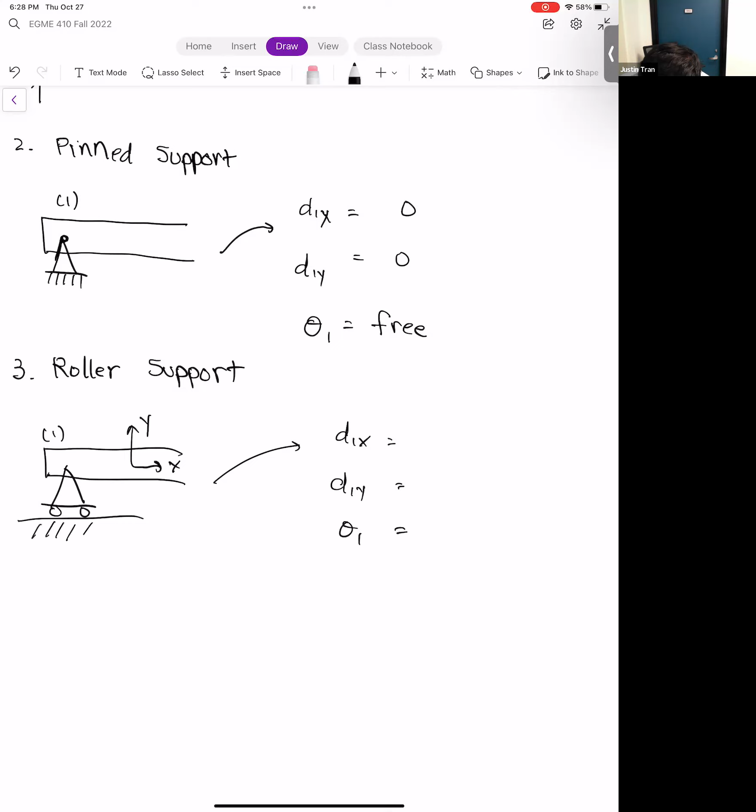Since the roller is on horizontal ground here, it's going to prevent deformation in the y direction, so we're going to say d1y is equal to 0. But the support here is free to roll in the x direction and is free to rotate as well because it's a pinned roller.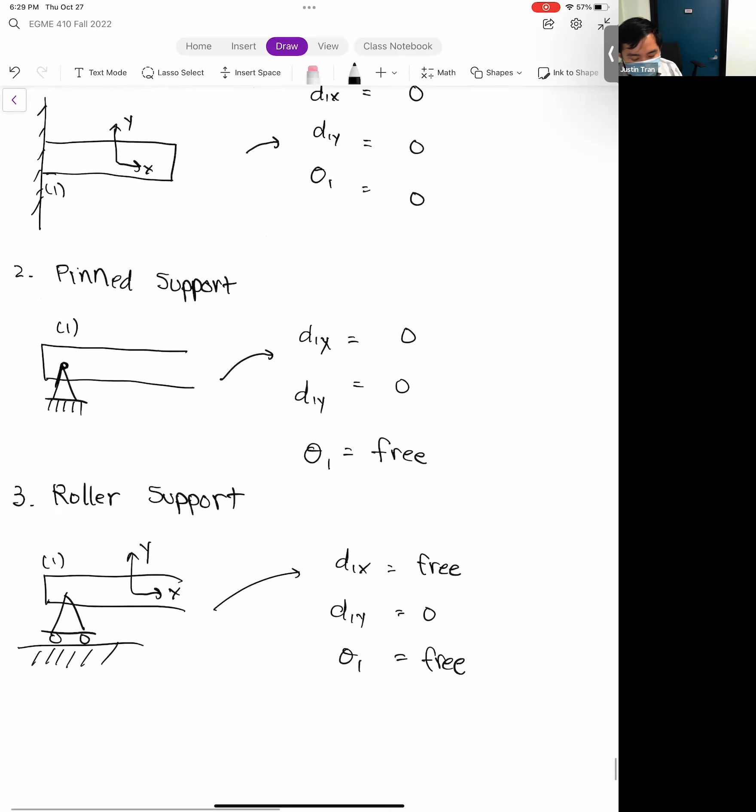So those are the three types of supports that we are mostly going to be working with. We have the fixed support, which fixes all three deformations. We have the pin support, which fixes just the x and y deformations. And we have the roller support, which fixes just one direction of the deformations. All right, any questions on this before we jump into an example?

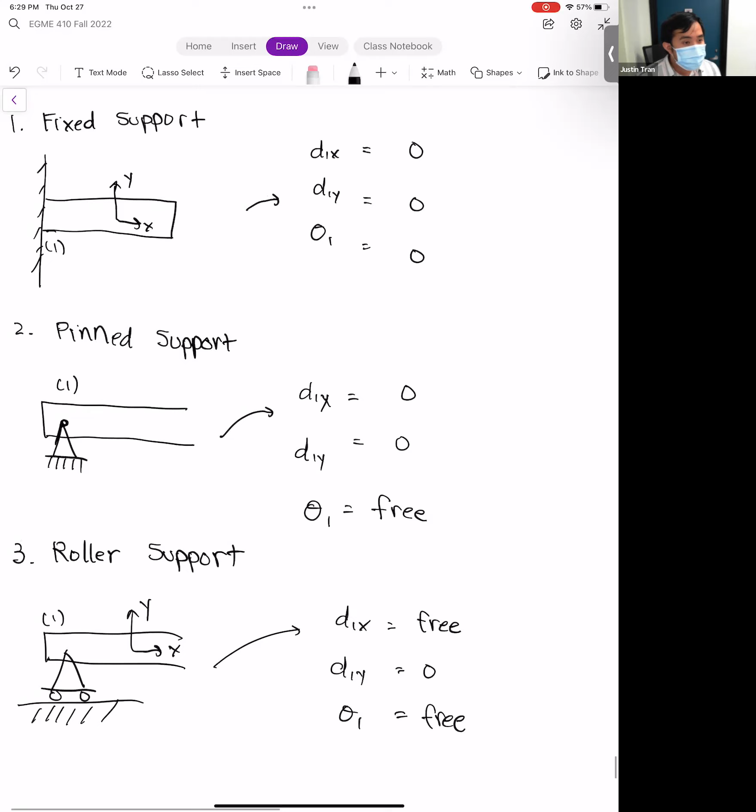Theta 1 is free because we have a pin right here, and so the roller is pinned to the structure. It's like it can rotate around that, I think.

It's interesting, I can't believe this semester we were literally dying in here because it was like 110 degrees outside and the AC was off, and now it's freezing cold and my nose won't stop running.

Crazy semesters. Okay, let's do an example to illustrate these concepts. We're going to do a beam problem, and our geometry here is going to be a beam, so that's going to change up the element stiffness matrices we use, but our process is still going to be the same.

We're going to write out the element stiffness matrices, assemble it into a single global system, apply our boundary conditions, and solve it. So our process is the same, it's just that the element stiffness matrix is different.

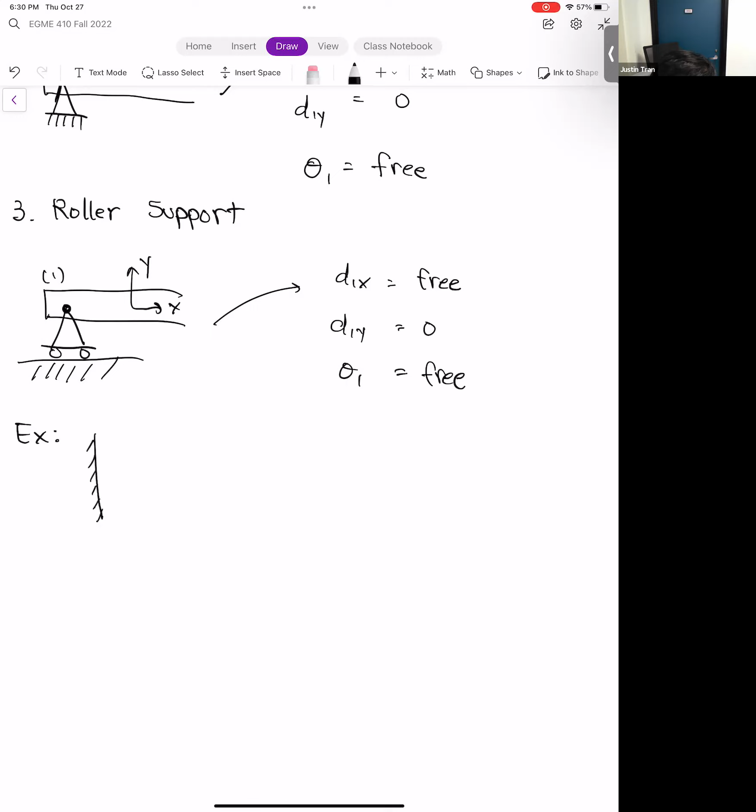Let's consider the following beam. I'm going to split this beam into two: the beam on the left I'll call beam A, the beam on the right I'll call beam B. We'll say that both beams here have a length of L.

On the left at node 1, beam A is going to be fixed into the wall. On the right at node 3, beam B is going to be pinned. And node 2 at the middle, we're going to have a single load going vertically downwards, P.

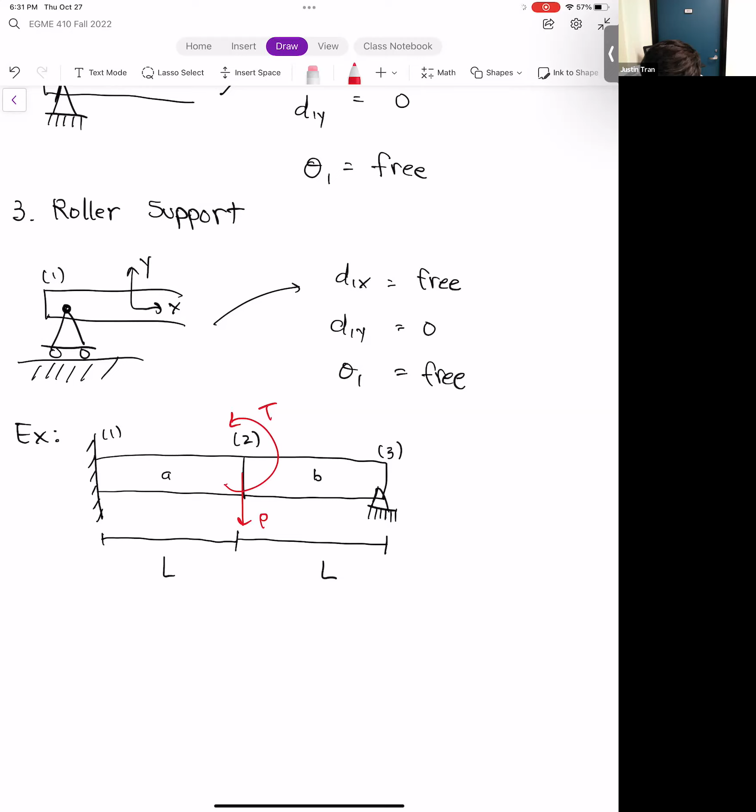In addition to that, we're going to have a torque applied on node 2. We'll call that T, so T here is a torque applied on node 2.

For this problem, we're going to assume that the Young's modulus and the moment of inertia are known. In fact, we're going to assume it's the same for both elements. We're going to ignore any axial displacements, and assume these are pure beams, so we're not going to have any compression or tension.

What we want to do, well in this case, I don't have any numbers here, so we can't fully solve this problem. But what we can do is assemble our global linear system and apply our boundary conditions.

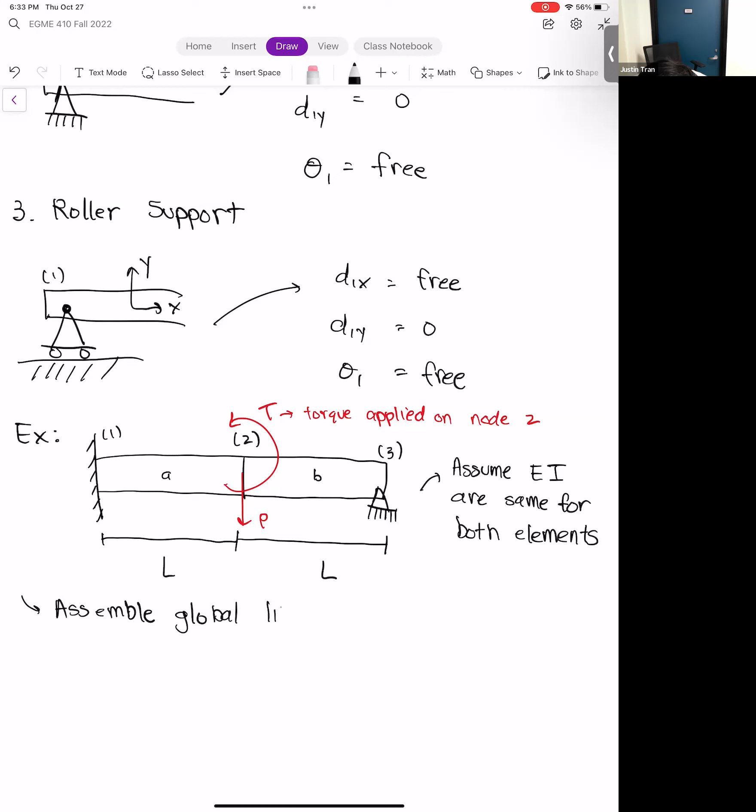All right, let's go through the process. I'll run out of time, but we'll see. This example here, we're not going to be plugging anything in because we don't have values, but it's to illustrate what to do for the different types of boundary conditions that we have.

Let's start with element A. Element A is a standard beam, so KA equals E times I, the Young's modulus multiplied by the moment of inertia, divided by L cubed. This is multiplied by our beam element stiffness matrix: 12, 6L, minus 12, 6L, and so on and so forth.

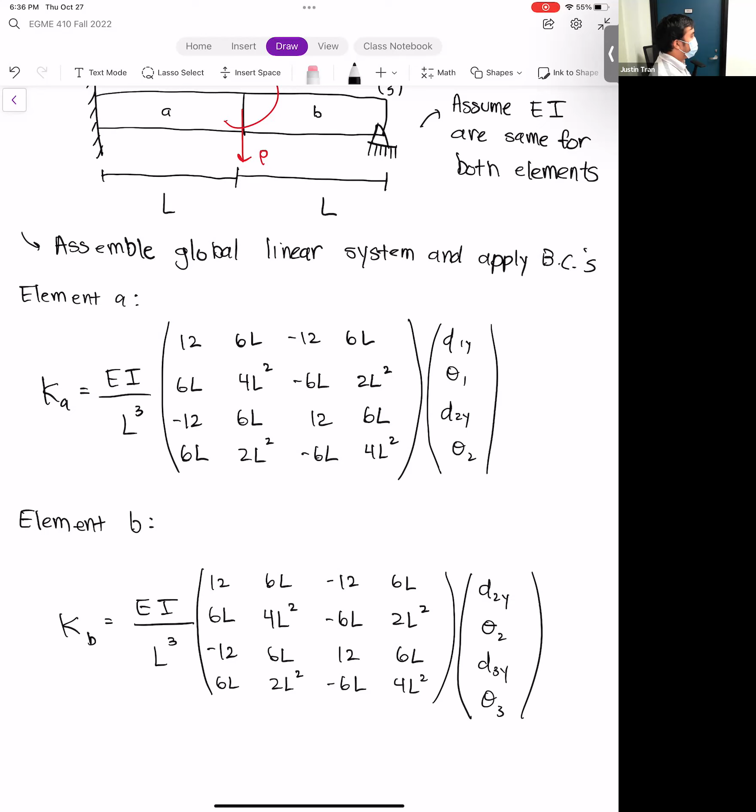Fairly straightforward, not too much to say there since we're not plugging in for that. Our next step is going to be assembly. I'll give people a chance to finish writing. Any questions on this?

All right, let's go ahead and assemble. Because we have 3 nodes and 2 degrees of freedom per node, our global stiffness matrix is going to be 6 by 6: D1Y, theta 1, D2Y, theta 2, D3Y, theta 3.

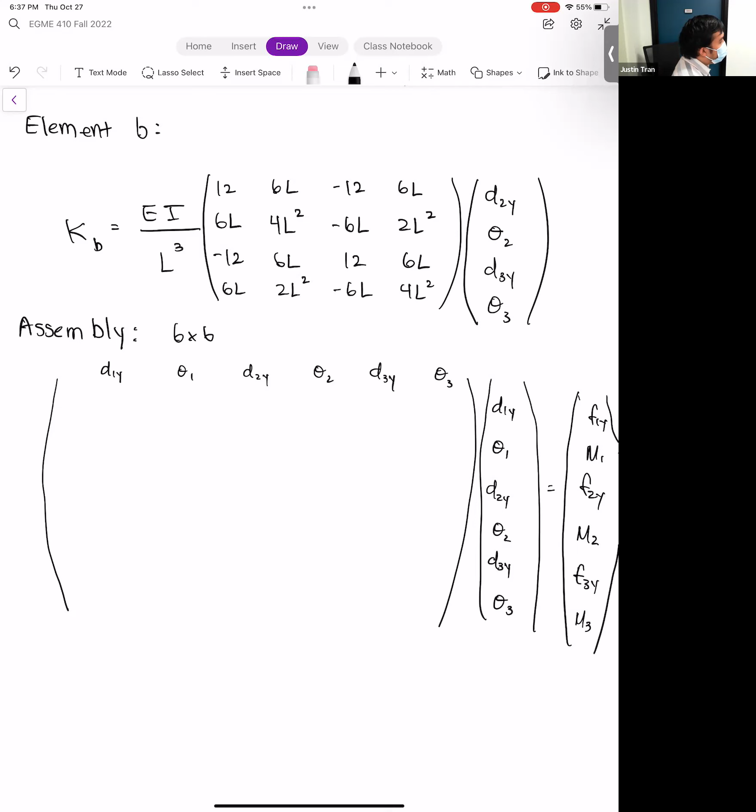All those are equal to the nodal forcing terms. So F1Y, M1, F2Y, M2, F3Y, M3.

So just like we did before, we're going to mark off the element stiffness matrices. Element A is going to be nodes 1 and 2. Let me go ahead and box those rows and columns.

And element B is going to be nodes 2 and 3. So we have just like that, okay? So pretty straightforward here, a pretty straightforward overlap.

All right, and so if you were to fill in the values here, let's do that really quick. So of course we have EI over L cubed out in front. 6L, 12, 6L.

And of course, on the overlap, we have 12 plus 12 here, which is 24. We have minus 6L plus 6L, so that's going to be 0. Minus 6L plus 6L is 0. And then 4L squared plus 4L squared, which is 8L squared. And everything else is more or less the same.

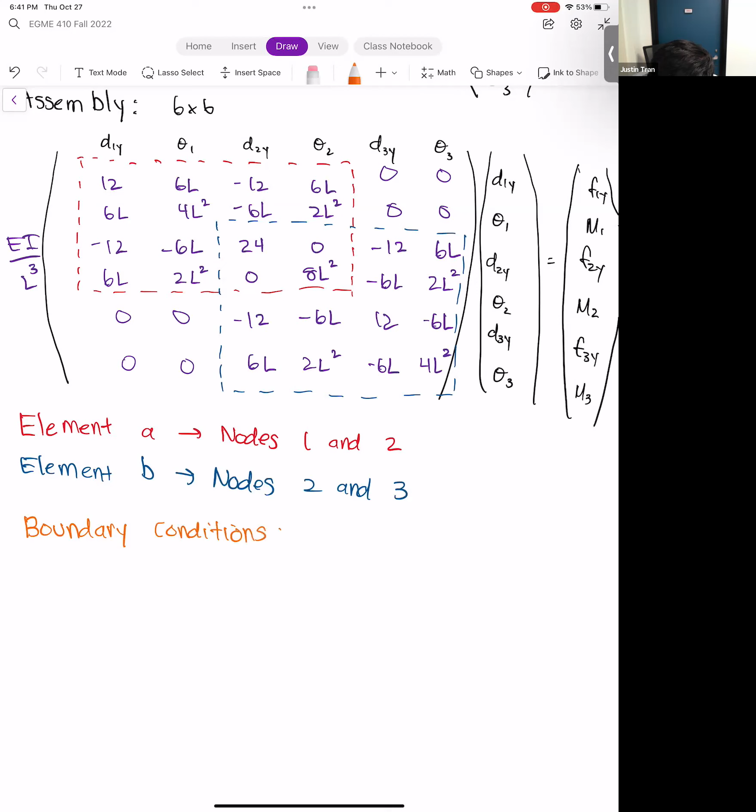And so our boundary condition is that we have a fixed support at node 1. So this tells us that U, or D1Y, and theta 1 are equal to 0. So that means these two rows here.

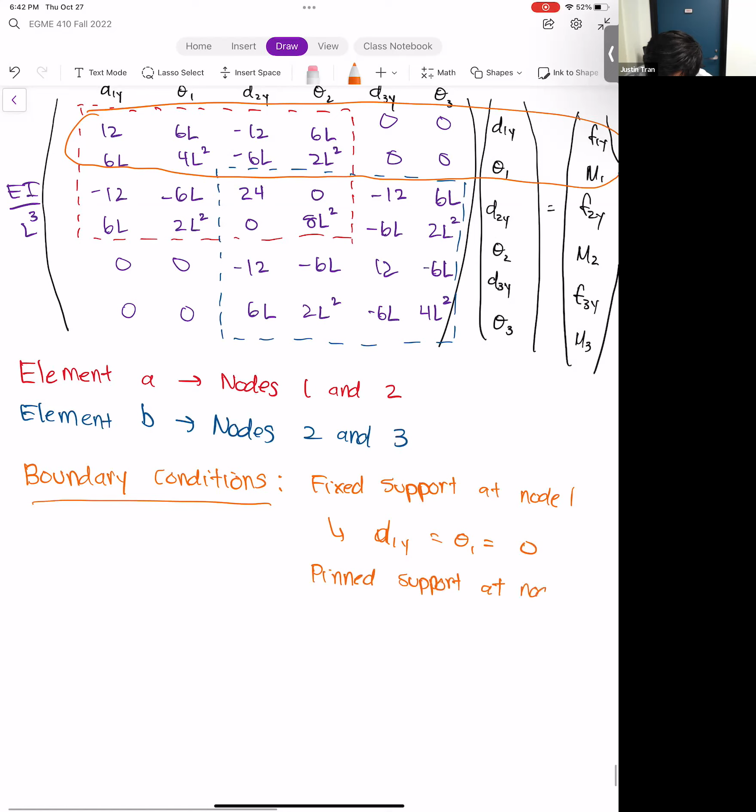And our other constraint is a pin support at node 3. And so that means that only the D3Y row is going to be equal to 0. We're going to leave the theta 3 row alone, so we're not going to find any boundary conditions there.

Let's see if the eraser makes... I don't know why it's taking so long.

Okay, so for the first 2 rows, we're going to have something that looks like that. And then for the last two, and for the D3Y row, it's going to look like this.

And so just like we normally do, we're going to put zeros on every off diagonal and a 1 on the diagonal. And then on the right-hand side forcing vector, we're going to put zeros in those rows as well. And then last thing we need to apply here are just the loads.

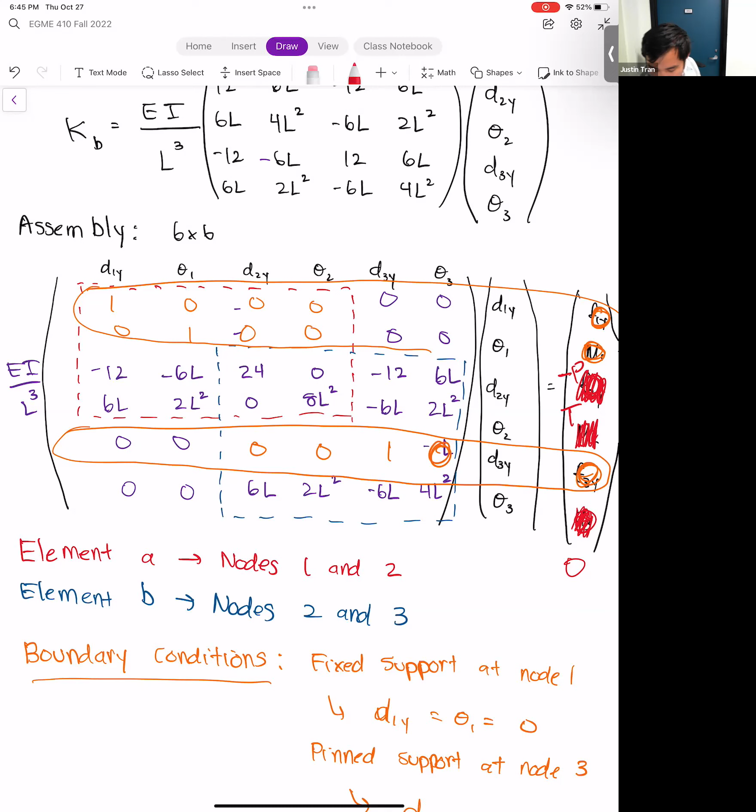Yeah, I think I might have messed some up. I missed a negative here, and I think there should be a negative. There is a negative here as well. Yeah, I missed these two negatives, I realized that as I was making it. Yeah, and so when this block right here overlaps with this block, the negatives from the top one kind of cancel out with the positive ones. Yeah, I just missed a couple negatives as I was writing, but yeah, sorry about that.